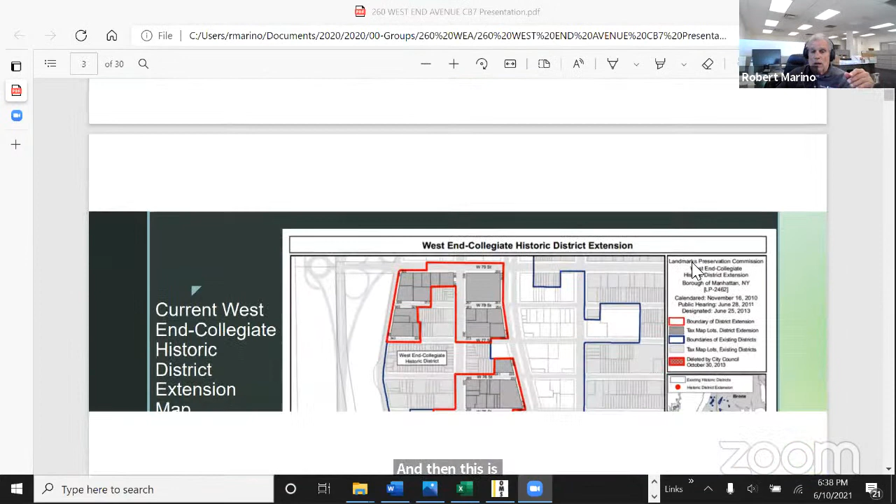And then this is what we sent to Landmarks and to you as well. So this is the map of the location. This is where the building is in the West End Collegiate District. This is an aerial view of the building on the corner of 72nd and West End. And if I'm going too fast or too slow, just nudge me. Thank you. This is the southeast corner. Yes. Okay, so this is a tax photo of the building, from 1940.

Here's another, this is a photo from West End Avenue. This is the building here on the right. I had to get two because the view is not so good from just a straight-on tax photo. And then this is from the 80s, tax photo. It's a better view from 72nd and West End. This is present day, kind of looks the same, except the bridging, which is everywhere in New York.

And then here's our elevation drawings. This is one of the primary facades, the west facade. Wow. And then here's the other facade, the north facade, which is another primary. They have two. And then these are the ones in the rear, to the east, non-visible. I wasn't sure if I should have included all of these or not, but they're included. Same with the south. They're not visible from the street.

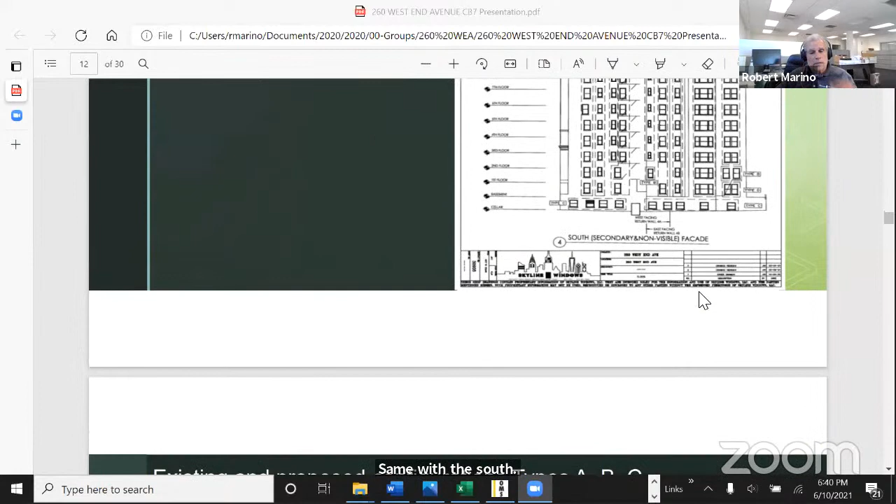These are the window types that we're looking to put in. So this is A, B, C. Here's the existing at the top, and the proposed are below. So they're basically all as they are now. Yeah, it's the same, right? Yes, sir. And then we have two more types. These are the double windows, and these are the triple windows. Some of these are in the rear, some are in the front. We call them out. And there's more, I forgot. So some of these in the back here are lot line windows. Those are fire rated windows.

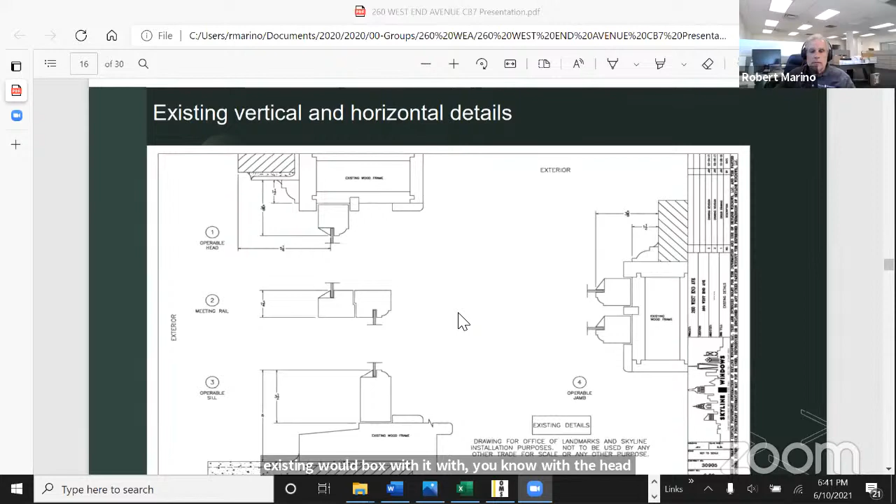And then here's our details of the existing wood box with the head and the sill and the jambs. And then this is the original mullion detail. And then here's our proposed sections. We're using our Series 100 window that we manufacture in Teterboro, New Jersey. We've passed many Landmarks criteria with it. This is our brick mold, which we believe is pretty close to the original brick mold. Over here too at the jamb.

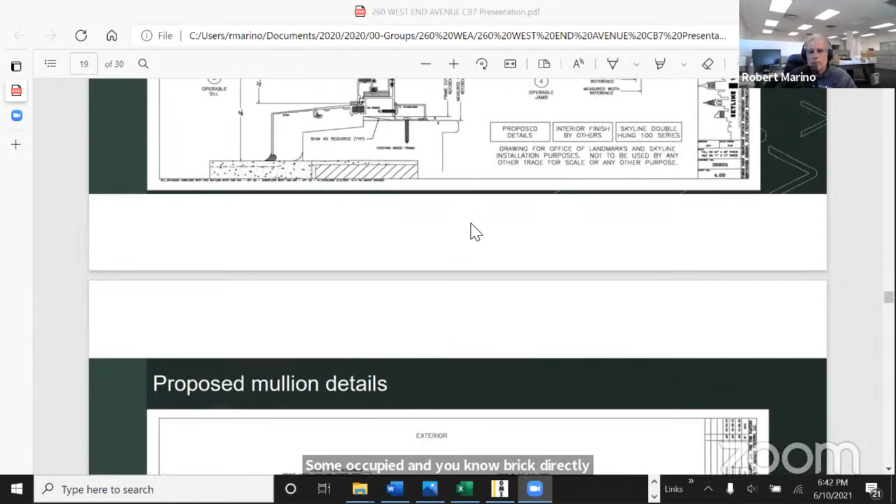We propose to do it within frame as the apartments are all occupied, and brick to brick would be pretty obtrusive to everybody. Here's our mullion detail, with this decorative here. There are lot line windows, so the lot lines have to be installed brick to brick in order to meet code. So this is the section of a proposed lot line window, which are on the south facade by the service entrance, which shows up in a photo.

These are photos of the primary facades with each of the window types, marked as per the elevations we had. This is the north facade, same thing. Now we're in the rear. This is all back in the courtyard, so none of this is visible from the street. So these are the lot line windows I was talking about. These are right over the service entrance on the corner of West End. It's this right here. These are all steel. They're supposed to be fire rated windows because of the proximity to this building right here.

So I found a window in the back that was an original window. This is from the 80s? No, before that, the 40s. This looks like an original window to me. Okay. It's a wood window. Yeah. It's got some kind of venting in it or something, I don't know. And then there's a close-up of the brick mold, which we feel our sculpted panning will closely replicate. So it'll be protective of what's underneath.

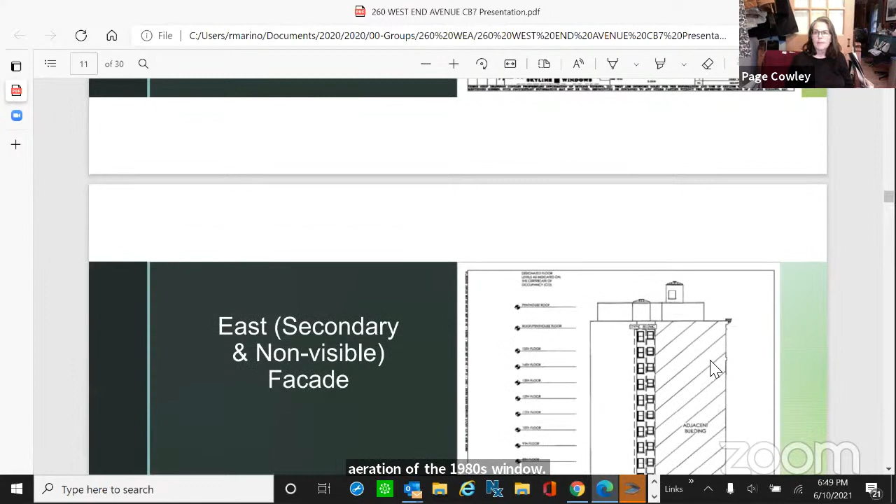Did we lose her? Yep, I have a few actually, and just interrupt me or stop me whenever. You showed the chronology and the documentation of the only surviving wood window, but didn't show us the documentation of the existing aluminum. Because in the old days, I'm an architect, I confess up front, sometimes the old brick mold or the window box for the sash weights were left in place. So I'm curious how much of the evisceration actually took place in the 1980s. In my experience, they tend to be a bit hit and miss. So can you elaborate on that?

As far as what the brick mold is underneath, you mean, are you asking me, did we remove the panning or capping from an existing window? Correct. No, we didn't. And that's a good question. Would it be terrible if we made a recommendation that, as part of your work, you document what you find? No, it wouldn't be terrible at all.

It sounds like it's a wise call to do that. I wouldn't argue with you on that. I think the reason we did is because we found an original one and we took the detail from that. But as to what's underneath, which is what your question is, you're right. I don't have that answer. But that's why we were going to remove the window and use the panning that we feel best serves the building, because it's pretty close to the original brick mold.

Well, my second question relates to that, because on the type A wood window that is at the back, the actual brick mold comes down in front of the ledge of the window, not where it meets the terracotta or brick or whatever the substrate is for the windowsill itself. And so I think that's an important detail, and it does have a curve. I couldn't see it. This is my first time looking at your project. Okay. So I apologize, but okay.

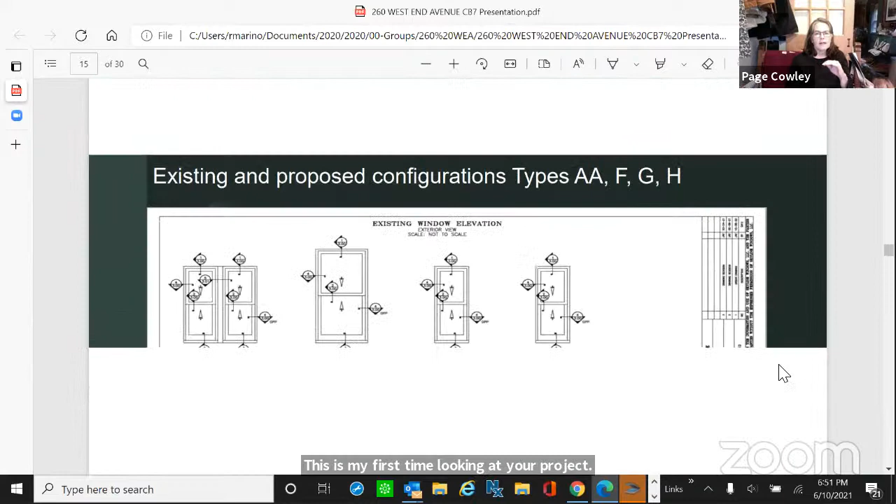If you look at the way, because what I'm concerned about is that this is a very contemporary window appearance, and there's no hearkening back to what was there, if you see what I mean. Now, this one you have, it's a shame I can't point. I'm concerned for 2 reasons. The way this is shown now, the angle at which the old window box was attached is only filled by mortar or caulk around the edge of the window.

And the original detail on the wood window shows that crevice being covered by part of the original decorative mullion that conceals that. So it's a good weather protection. So I'm a little concerned about that. And also the shape of the brick mold that you're showing right now. Oh, those are the existing ones. Is this a hybrid where the box is wood and the existing 1980s windows were just fitted to that?

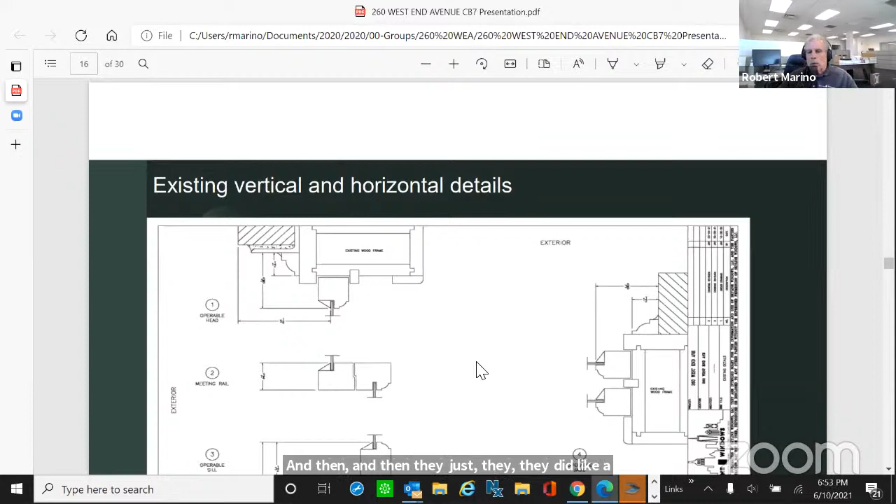All of these windows were installed over the master frame, the master wood frame. All of them were, and then they did like a capping over it, which has no shape. So we have a couple of panning details, OG and Colonial, that we use; this one we're using Colonial. Here's an example of what we're talking about doing. You can see in the upper left, over here. We feel it mirrors it. It goes right with it, we think.

Okay, so what we did was when we went to measure some of these windows, like we said, we did not rip off any of the capping, but my head engineer did detail the window, and that was the detail that he drew, which is based on what's there in the one window that's exposed. That's what his drawing was. Did I do that? No, I didn't do that. I'm not a good drawer. I'm not a good artist. Okay, and my last questions are much easier.

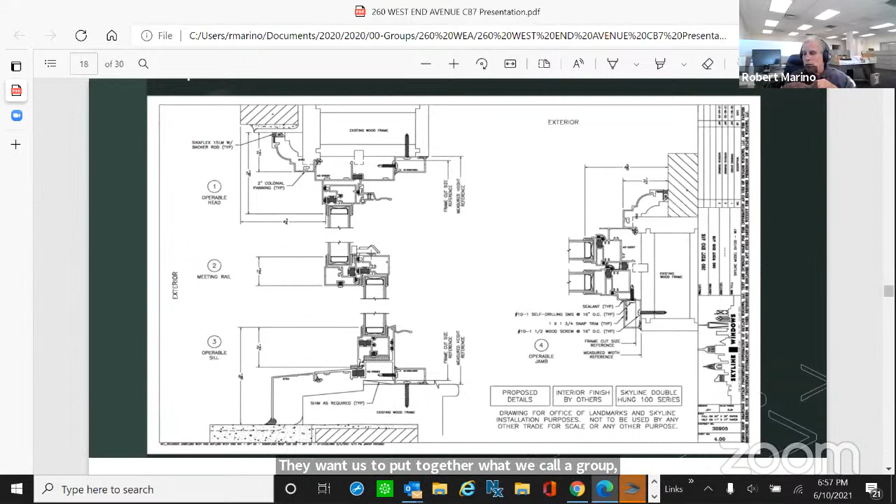Thank you, Kay. I guess my question had been, do you know if the building is anticipating changing all the windows at once, or is this a plan? No, they want us to put together what we call a group, because the building is not paying, they're not doing it as an assessment. Okay. Each individual owner would pay for it as they upgrade. It's very typical. Oh, yeah. Okay, thank you. Anybody else on the committee have a question?

Okay, how about board members, non-committee board members? Ira, is he still here? Let's see. We take a vote? Doug, any questions? Ira? Miranda? No? Anybody from the public, Michelle? Public members, any questions? They would need to raise their hands to ask one, so look for your raise hand function on your participants button. Okay, I don't see anybody. Mark, can you confirm that? Is nobody from the public? I see no hands raised. Okay, Michele Parker, any questions?

Okay, I'd like to propose that we resolve to accept. I don't have any questions. Thank you. Oh, okay. Thanks, Michelle. I would like to propose that the resolution is accepted as proposed, but I want to add Page's recommendation, but I just don't know how to word that. So can you help us out, Page, what your recommendation was? Approve still with the recommendation.

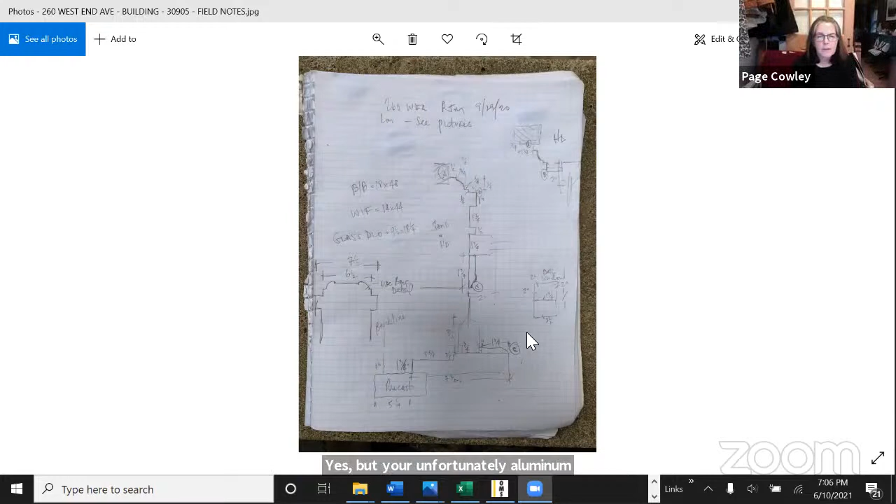Do you see this notepad here? Yes. Okay, these are Bob's details, right there, which I guess I could have included for you. Maybe that would have made it more simple. But those are his details. They look pretty precise to me. Yes, but unfortunately, aluminum doesn't behave the same way. No, I know, but what I'm saying is he took the existing little type A window and drew this. That's what he drew. Okay, that's good. That's a start, but is that the same detail for every single window type on two sides of the building? I guess I would have to try something on the other side of the building to see. I got you.

I want you to be a success, and in the 20 years it's going to take you to get this thing done, I want them all to be perfect. Hey, so did my mother want me to be a success, you know? There you go. Have your mother call me.

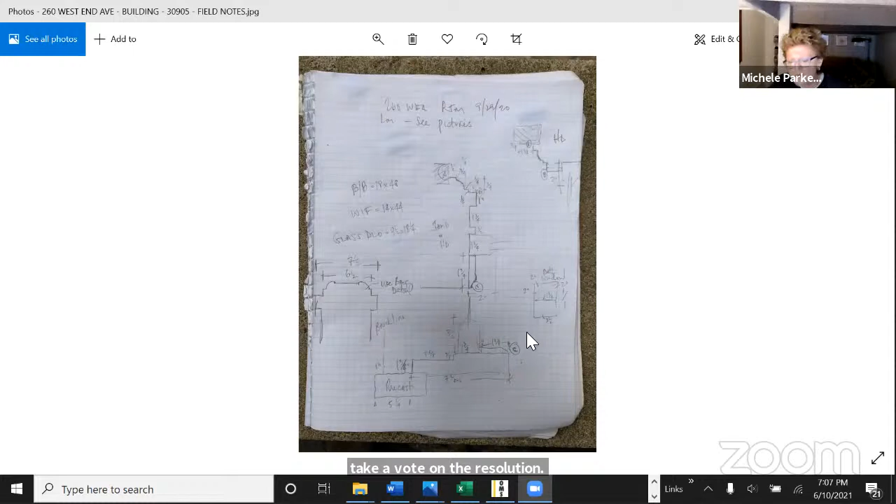I think for purposes of full board, though, we have to take a vote on the resolution. We have to have a resolution and vote on it. And then we can also say that the applicant agrees to come back to us on the 8th of July.

Could have a resolution that is approving pending a return with these details on the 8th. I mean, that would be my suggestion. From a process standpoint, Mark, I think you would agree, the last thing we want is to deny the application. We'd like to work with this applicant and make sure that they can come back and be successful. I don't know why, in the past, we've never voted down things that we needed to see again.

Okay, it's your call. So from a process standpoint, as opposed to an artistic standpoint, we either need an agreement that they're coming back, or we need to take an action that would fill the gap if, for whatever reason, the applicant doesn't come back, because Robert's here as the expert and the consultant, but he's not the client, and it's a client decision.

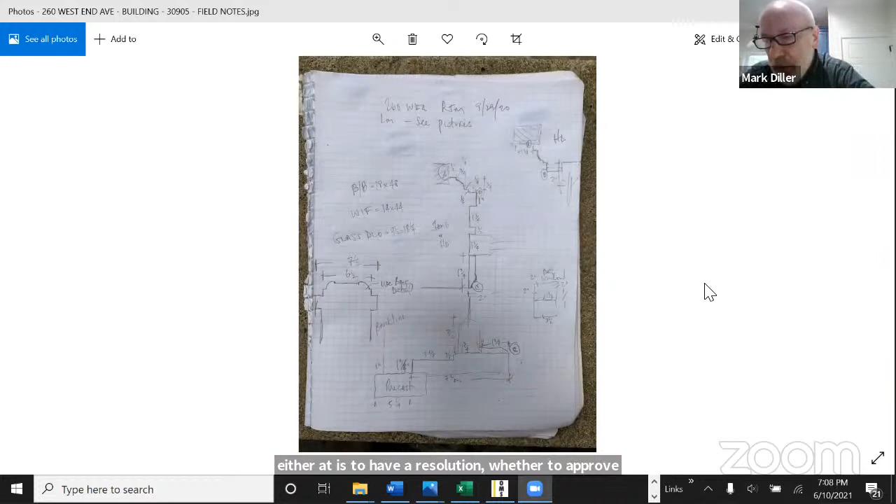I guess the thing to do would be to have a resolution, whether to approve or disapprove. And I take Page's point that we would want to approve, but we would have a fairly serious condition, and that condition is that the brick molds, and help me with the correct terminology, Page, but the brick molds conform as exactly as humanly possible to the historic fabric that was in place prior to the 1980 replacement windows. Is that language getting at it? You're getting close to it?

Yeah, I would elaborate on that only because there's so much panning already. When you've got an aluminum window that you're trying to follow with another aluminum window, you don't know what's underneath. You see what I mean? Wait, the aluminum window is over the wood window. The aluminum window would come out and the panning would come out, and then we would cover the existing wood that's under there. Yeah, but we haven't seen that. You've got one detail in one location, and this is two sides with a special top. So I'm giving you every benefit of the doubt that you're gonna be perfect if you come back and do some more digging. Got you.

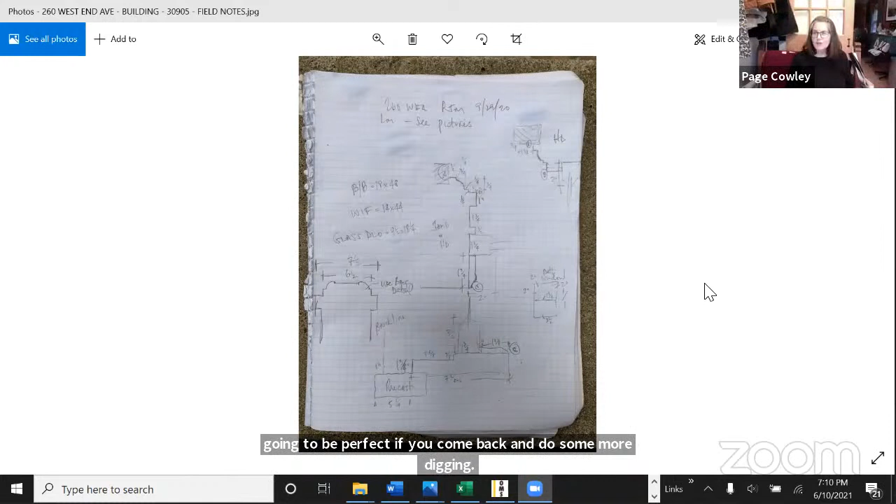Now you sounded more like my mother again. There you go. I'm way too young to be your mother. Of course you are. I know that. I'm just teasing.

Okay, so the resolution is to approve the application with that condition. No, I wouldn't do that, because then they won't come back. It can't be an approval; it has to be a denial until they come back and give us the information we need to make an accurate vote. And I won't say any more. Excuse me, but I agree with Page on that.

But I have a question. Would it be a problem to delay the LPC hearing, Robert? It would be a problem for my clients in the building. It would be a big problem because it's been going on for some time. We got slowed down by the pandemic, and they paid money for us to do this. So I would say yes. Our hearing is July 20th.

Mark, here's an idea to wrap this up. Mark, Michelle and Kay, if I may, one thing that you could agree to do is to ask them to come back on July 8th, which is before the 20th, right? And then we would agree that whatever resolution comes out of committee, we would not require a full board vote on that, so they could keep their reservation for a public hearing, and CB7 will be heard based on a committee resolution, which dilutes the impact of what we say a little bit, but that would be a way to have our cake and eat it too.

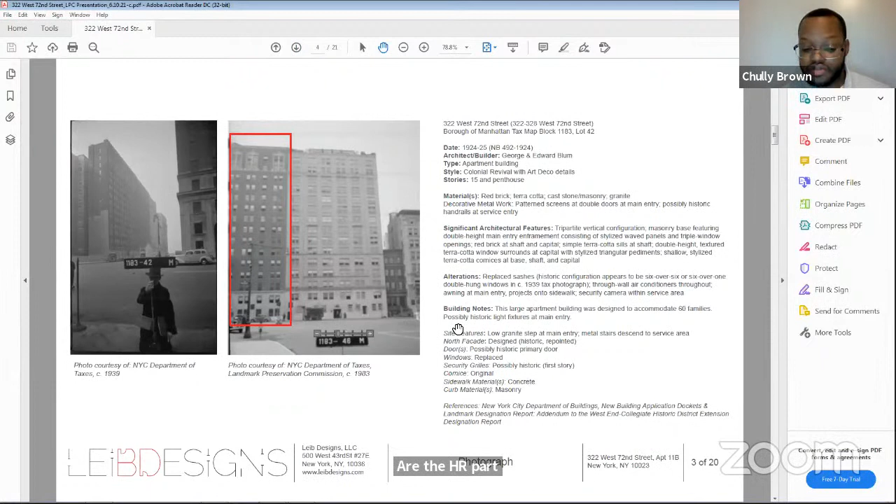From the designation report, the main significant features of the building are the tripartite vertical configuration, the masonry base shown here, the entry with the triple windows, which is shown here. The entry with the triple windows, the masonry base, the materials such as brick, red brick, and terracotta sills. And at the very top, we have these triangular pediments at the penthouse apartment.

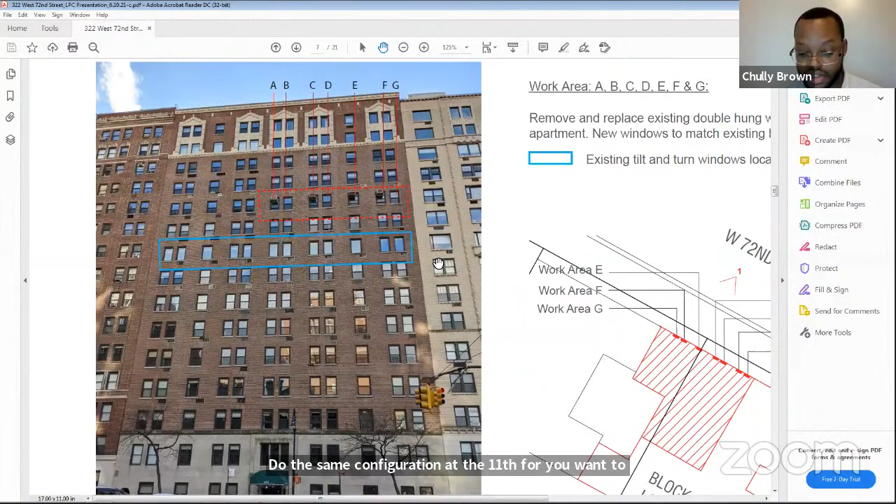The existing condition we have at this building at the 9th floor, we have these single pane windows at the 9th floor apartment. Our apartment is at the 11th floor with the double hung, and we want to do the same configuration at the 11th floor. We want to change our windows from double hung to single pane windows. We could see similar condition at the adjacent building, 330 West 72nd Street, where you have random single pane windows in relation to the 322 West 72nd Street building.

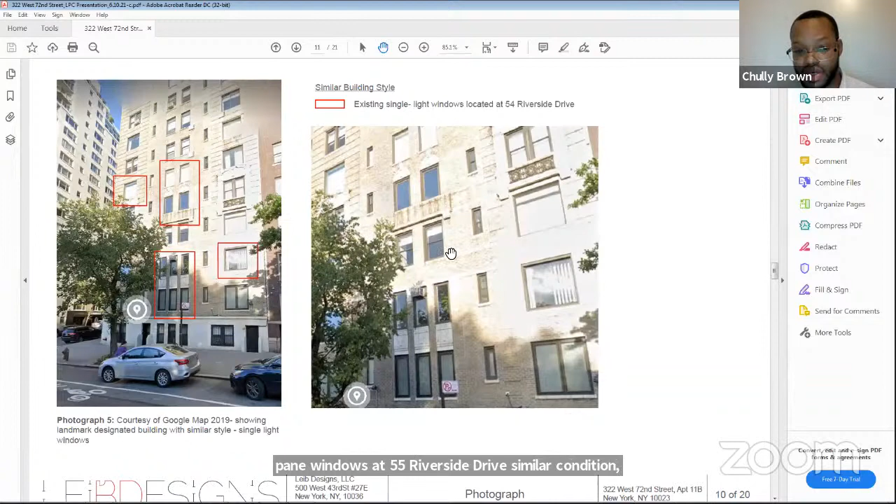I did some research and we found a similar condition within the district at 54 Riverside Drive, not too far away from 72nd Street. We can see this similar condition of having single pane windows. At 55 Riverside Drive, similar condition, designated building with these single pane windows. At 52 Riverside Drive, similar condition. At 243 West 70th Street, similar condition. At 240 West 73rd Street, similar condition. And also at 239 West 77th Street, similar condition. As well as 235 West End Avenue, similar condition.

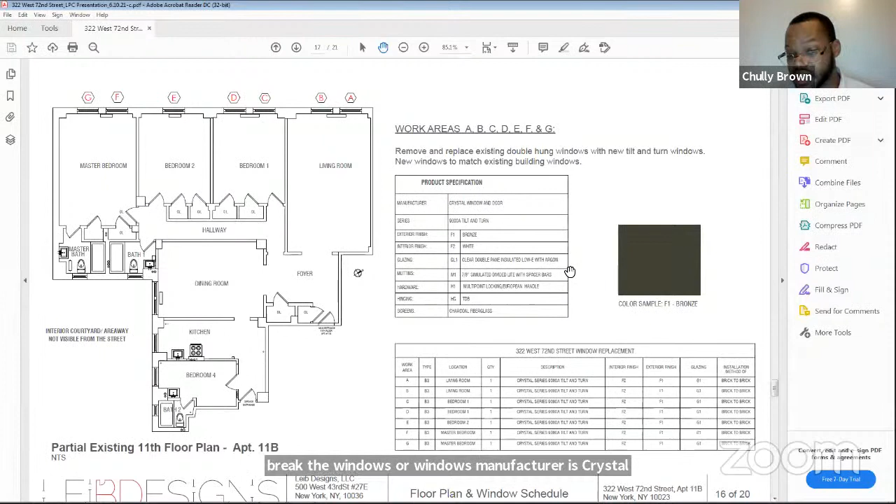Here we're showing the floor plan of the existing apartment and our window location. We plan to replace the windows with the same finish as bronze, brick to brick. The windows manufacturer is Crystal Series 900. Here we're showing the work areas within the apartment, A through D, the existing double hung windows from the interior. E through F, the existing windows from the interior. Partial facade showing the double hung windows and the proposed tilt and turn. We're also showing the installation guide and sectional details.

Okay, what time? 7:30 to 11:30. Susan, we can hear you. I'm sorry, Mr. Brown. Okay.

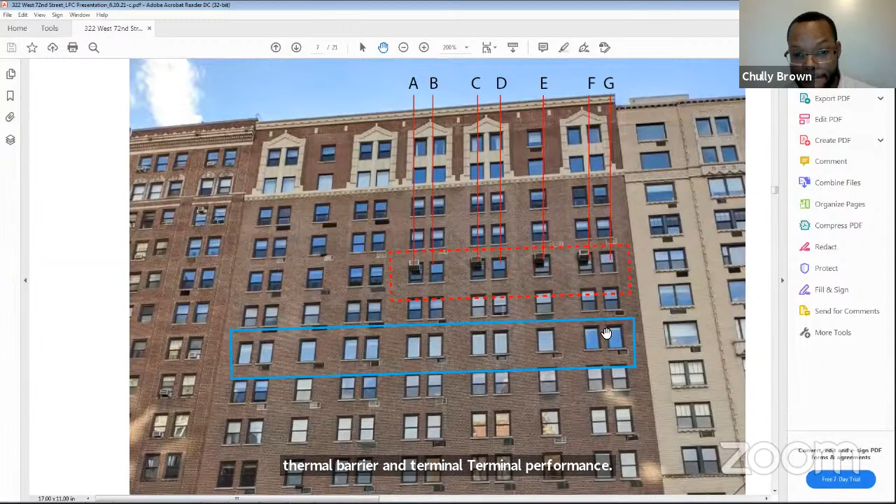I'm just gonna go back to the main facade. Looking closely at the facade, we can see at the 9th floor, we have the single pane windows, and also at the very top, the penthouse, we have the single pane windows. So we believe our proposal doesn't hinder the significant features of the building. These windows provide a wide range of benefits. They're easier to clean, better ventilation, better thermal barrier, and thermal performance. Thank you. Thank you. Questions from the committee?

Peter goes first. Yeah, I think it's a quandary. I think it's not so much a question that I have, but we find ourselves in the middle of something that could go either way. I think it would be unfortunate to have a bit of both the single pane and the double hung sort of live together in disharmony. I, for one, am not that keen on having to continue the double hung for historic reasons. I like the single pane, but I think mixing the two is not ideal. So I think it's a quandary. I don't know what one does.

I would say if this is a building that didn't have the single pane window, that it would be a mistake to allow one and keep what is there. But the fact that there are already quite a few buildings with the single pane creates a situation for us that's hard to establish a better way to go. So I'm perplexed as what to do. I don't know. It's a tough situation.

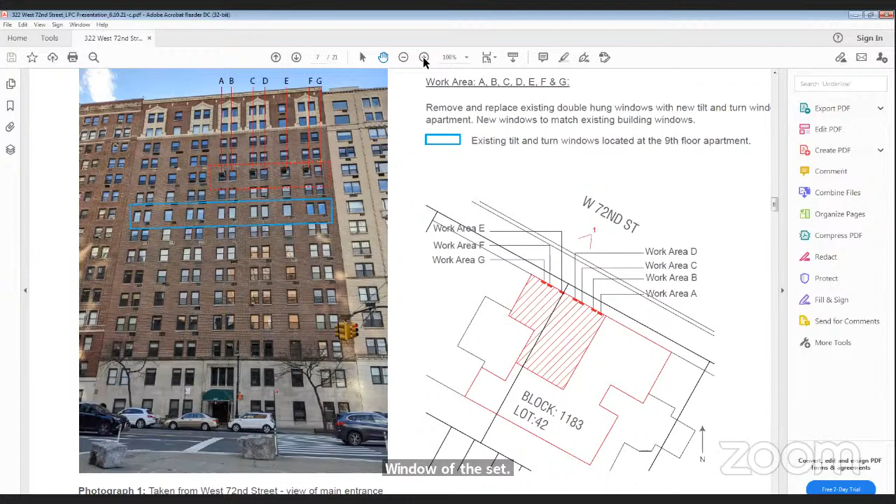As far as standardizing the through-wall ACs, the building's request and what Julie prepared previously for that application was that we try to match what the building is considering standard, or the more recent through-wall air conditioner openings, which was basically a mid-size one, very similar to the floor below, lined off the west window of the sets. There's really no consistent pattern or standard, but they all tend to favor the western edge of the window. So that's what we did. We made sure that it wasn't oversized, tried to minimize the impact, but in some way continue some kind of pattern. So I don't believe the building would need any more through-wall openings besides the ones that we just did.

Is it your intention then that the other tenants have the package units on the roof? Correct. It's unlikely that anybody else would have to do a through-wall AC. It looks like we were the last apartment that did not have that. And are you planning to close up some of these openings that you see? No, all the openings that are made are in use. And the ones that are not there will not be needed due to the condensers already installed that provide AC for those apartments. Thank you very much. That's a very good explanation. I wish that had been documented on the facade. That would help. Okay, thank you. So our focus is really about the windows. We did speak to board members and other owners.

The tendency of the building is to go to the single pane tip and turns or tilt and turns. It doesn't seem like anybody has an interest, especially because the top two floors, the four nicer apartments on the front, it's unlikely that they would go back and take out those windows and go to a double hung. And then the other people on the lower floors, I know they like the single pane. So it seemed like the tendency of the building, if we wanted to standardize, which of course I would love, would be towards a single pane window.

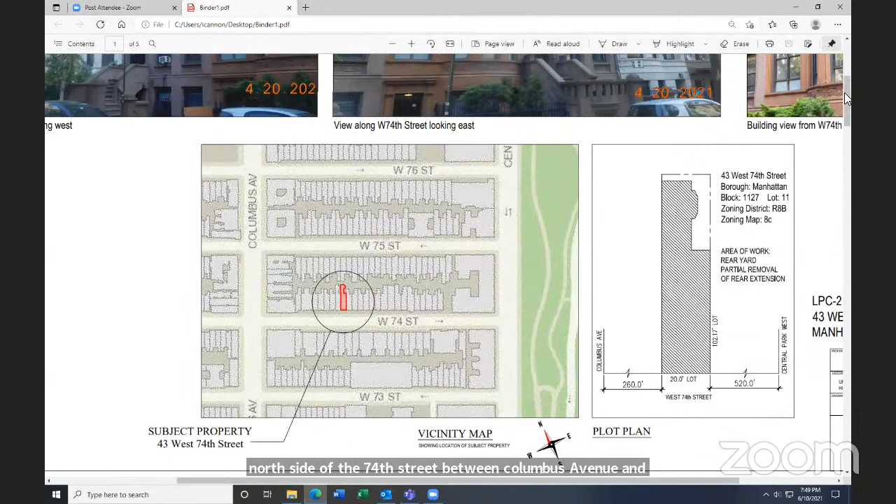Okay, can you see that screen? Yes. So this first sheet is to just show the location, get you all on the same page. The property is 43 West 74th Street. It's on the north side of 74th Street between Columbus Avenue and Central Park West. To the right is the view of the building, and we have two photographs, one including the building looking east, so you can see it within context, and a second photograph of the building looking west. So again, just to provide some context.

This particular building was designed and built by a single architect with 5 buildings together. So this is one of 5 that the architect designed and built. That's the first page. The second page provides a little background of the building itself. This map from the city is dated 1889 to 1890, when it was first constructed. As you can see, most of the buildings had a rear extension, a smaller portion of the building that extended into the rear yard, and in 1889 all of those rear extensions were approximately the same.

Then we get to a city map dated 1920, and all of a sudden you see something different. Somebody at some point had installed an additional extension at the rear yard of the 43 building and also at the 45 building. So of the 5 buildings designed by this single architect, you've got these 2 buildings that are different. That's something that was added.

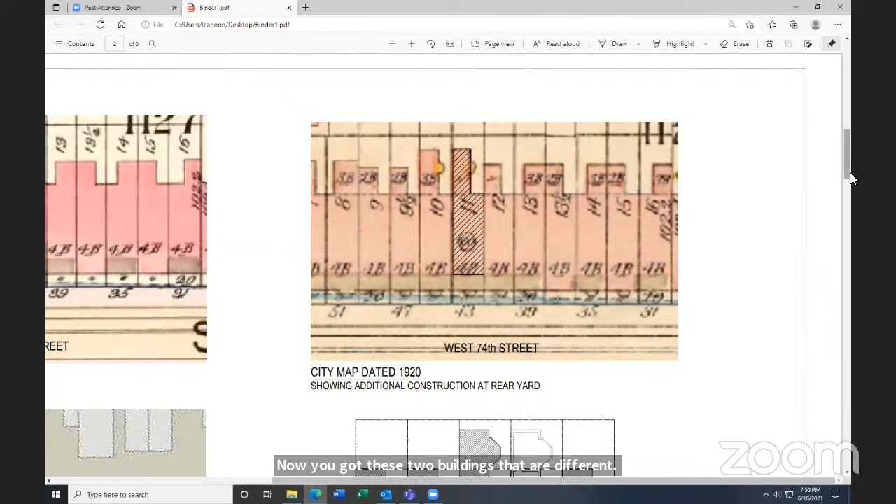And then this is the current configuration showing these are the 5 buildings that, in the designation report by Landmarks in this historic district, they point out for these 5 buildings, all designed by the same architect. So this anomaly that was added at some later date is still existing at this time. So our proposal is very simple. It's very straightforward. Nothing visible, nothing in terms of the front of the building.

This owner owns a number of properties. He's involved in real estate and construction. They own a number of properties in landmark districts, and so we present to Landmarks quite a bit. We just completed approximately $1 million restoration, replaced almost 1,000 pieces of historic detailing on a building on a cast iron facade downtown. Landmarks was so thrilled that they wanted to present this as an award to the building. So this is the owner.

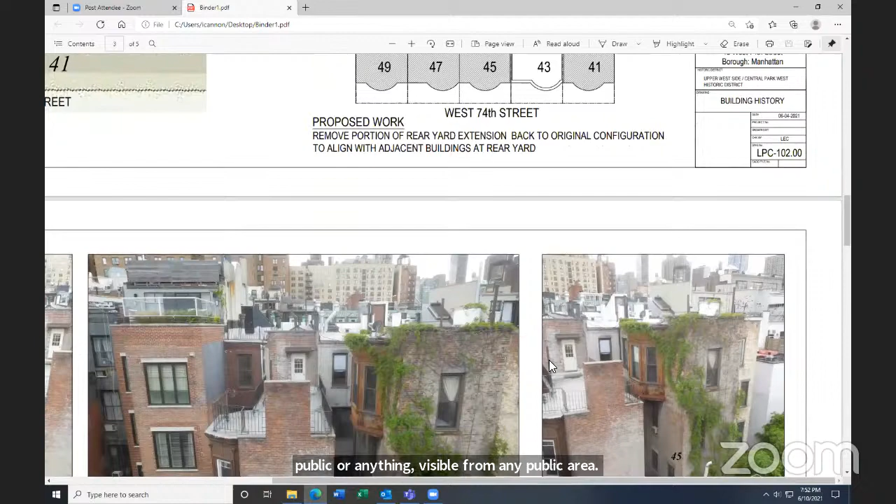So the front of the building will be fully restored, 100%, total restoration. And the only thing that Landmarks wanted us to go to a public hearing for was the removal of this rear portion of the building. So again, nothing in our application here is anything public or anything visible from any public area. So that gives you kind of the context of the property and the history.

We got access to a building on the other side of the building. So we took some photographs just to show the rear portion of the building within the context of the buildings adjacent to it. So the photograph to the left is showing the 43 building, which is our building. And then adjacent to the east is 41. They've done some work with replacing windows and things like that. And the center photograph shows both the 43 building and the building to the east, and then the building to the west as well, which hasn't done any renovation. And then the photograph to the right showing, again, context.

This photograph kind of gives you an idea as to what our intent is. So this photograph is taken from the rear of the 43 building looking east. So you can see where most of the buildings on the block have an alignment to this rear extension. And that is our goal. That is what we're going to do, is to restore the building back to its original design and to align with the rear of the other adjacent buildings.

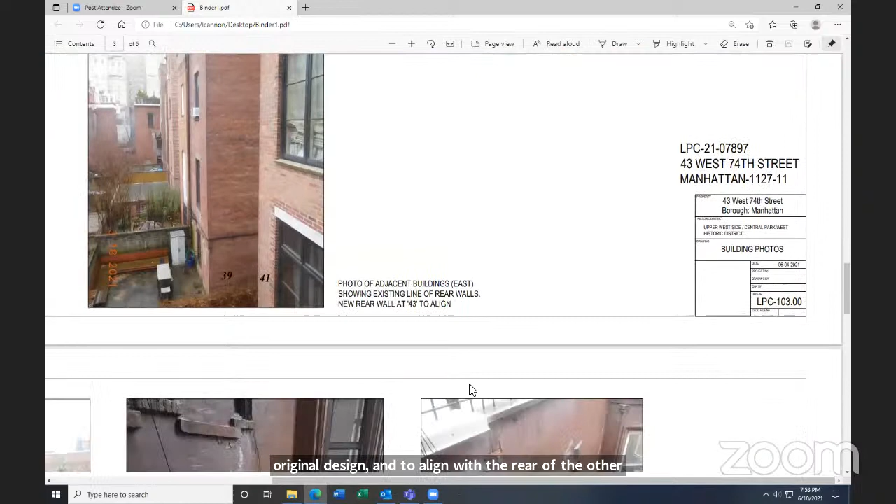These are some photographs just of existing site context. So right now, with the extension as it is, we only have about a 3.5 foot distance from the rear wall of that extension to the rear property line. So it's really unusable. And as you can see, it's not in good condition. And one of the things that Landmarks requested is that whatever is remaining, as you can see, the brick has been painted and it's in poor condition, is that we restore the original brick finish. And the owner said, absolutely, they will do that.

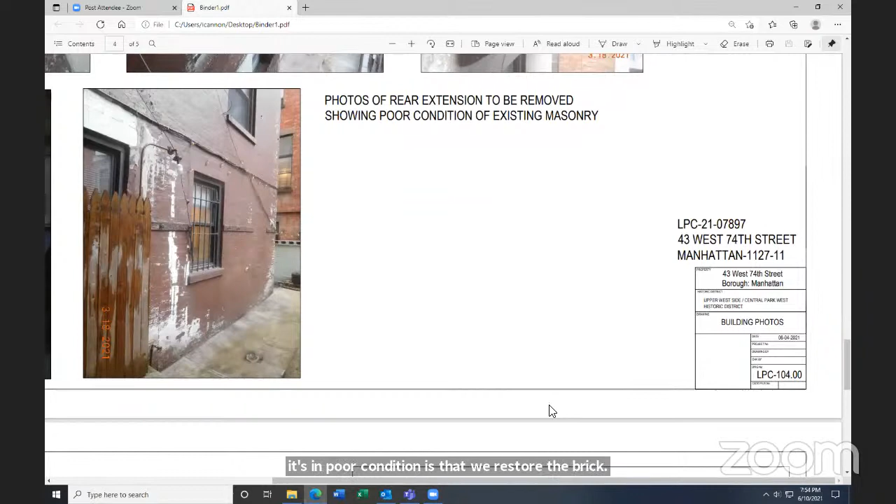And then this is just to kind of summarize what we're doing, showing the very rear portion that was added at a later date, not intended by the original architect. We're going to take that off. We reviewed this with the deputy director at Landmarks quite extensively. And they said in writing, they think this is an appropriate change and they have no objection to this. They did ask us for three things. And this diagram with the photograph shows those three things. And again, the owner has certainly agreed to these.

One is that there's a small portion of the brick parapet at the roof. I don't know why it's there. They want that removed, so we will remove that. Second thing is, if you see that little brown facade, there's a little bit of a brick cornice. They want that restored all the way across the rear wall. And again, the owner said, absolutely, we will certainly do that. And then the third one was the window. The only window that they wanted to maintain the existing size is this window at the 5th floor. And again, the owner said, absolutely, we will do that. That's our presentation and that's our proposal. Thank you very much.

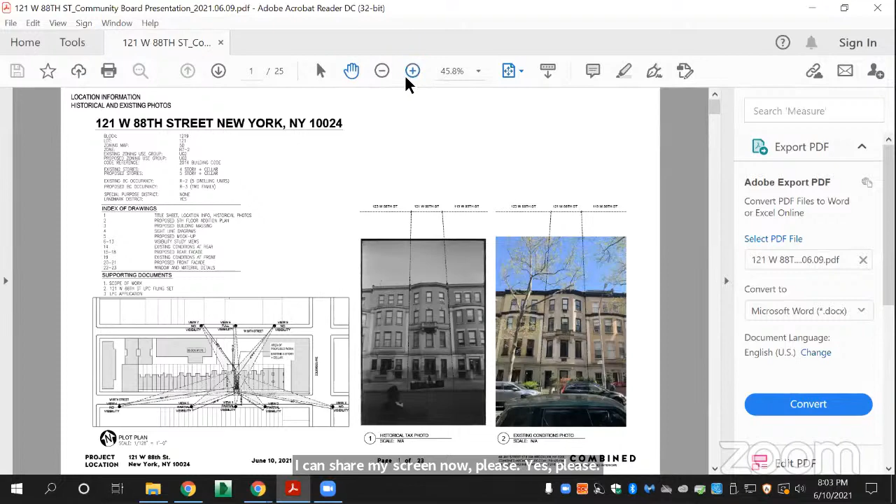Got it. Can you guys see my screen? Yes. Very good. I'm trying to go to full screen.

So thank you for meeting with us this evening. This is a proposal; this property came before you twice previously with a different team, I think it was around 2019. The scope of work was somewhat similar. It was a vertical enlargement, as well as some modifications on the rear of the building. My understanding is that initially the proposal was to do some demolition in the back. That was not found to be acceptable.

A second proposal was put forth to Landmarks. Since then, they've changed the project team, and this is a new proposal for an enlargement on the roof and some modifications of the rear of this building at 121 West 88th Street. It's an 1898 Renaissance Revival townhouse by Alonzo B. Kight.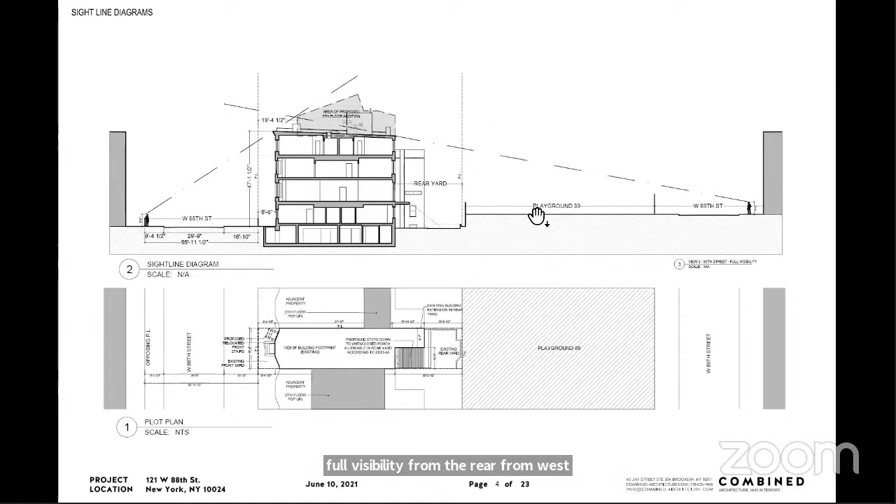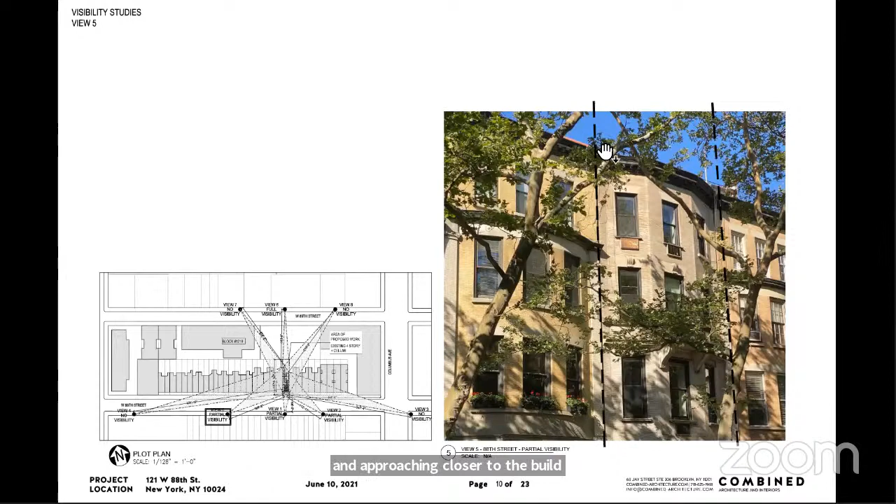On the angle, that's the roof line. So it's about 10 to 12 inches of visibility of that addition roof line from West 88th, front facade of the building. Moving down the block, there's no visibility. From the other angle, looking back, no visibility. And approaching closer to the building, again on the diagonal, you're getting about 4 or 6 inches of that roof line, which is the orange mesh you're seeing right there.

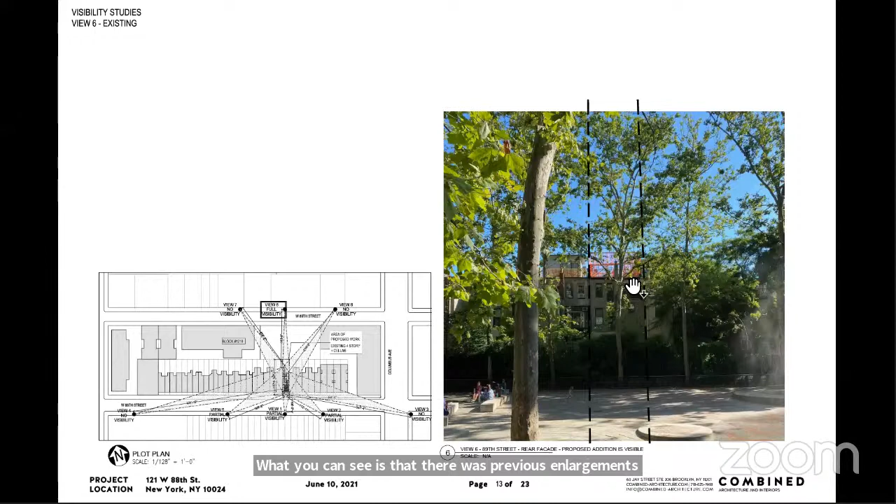From West 89th Street, no visibility from the two oblique angles, but as you approach frontally, the nature of the property is that all of these rear facades are visible due to the presence of this playground here. What you can see is that there were previous enlargements on both of the adjacent structures that predated our proposal, obviously. Some of them may have predated even the designation; I don't know the history of that. This was done earlier in the year, so there's fewer trees blocking it. Our property is the one in the center.

A couple of things to point out, and I think this was important in the last set of reviews, is that the footprint has a series of extensions that are mirrored with the adjacent property along the block. This was all developed as a continuous series of row houses by the same architect and developer. We are proposing to maintain all of that massing. What we are looking to do is to rationalize the rear windows, enlarging them slightly, and then obviously the addition on top. What you're seeing in the foreground is the portion which aligns with the adjacent building. Above that, this is set back significantly due to the taper of the roof and setback. That's the door access. This is the mechanical equipment and screening, and then there's a skylight in between.

The images on the right are the rendering that's kind of showing the right and below the proposal within the context. So again, that setback portion is not entirely invisible, but it's largely obscured due to the sight lines because of the setback. So you're seeing a little bit of the pergola and then the mechanical screening and the bulkhead there.

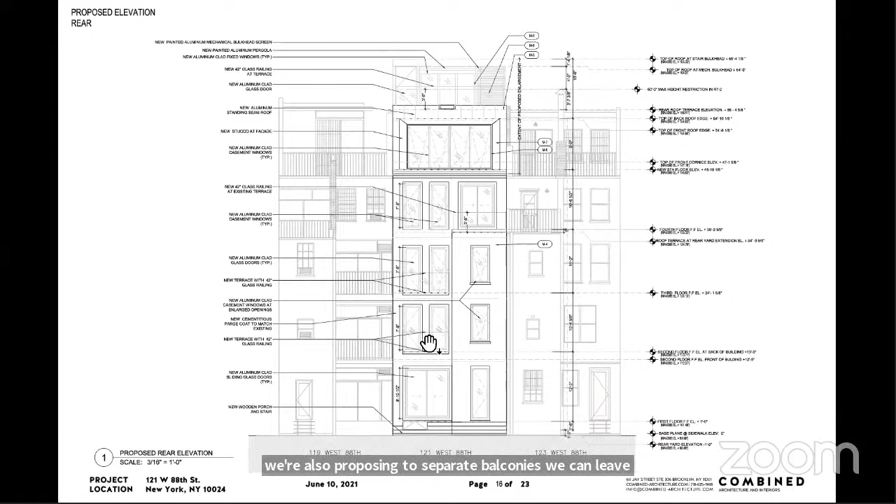Oh, sorry, went too quickly there. That's again just showing the rendering within context, matching the massing of the existing, and then just rationalizing the window fenestration pattern. Existing front. So on the front of the building, there's a series of staff level approvals that we were just asked to also include in the presentation.

And so the building originally had a center entry, which is also consistent with many others on the block. At some point, it had been modified to a side entry. Our intention is to restore it to the center, so modifying this back to the original configuration, including an entry from the gate from the sidewalk. So you're seeing here that front restored entry.

There's also, historically, some through-wall air conditioning units that had been put through the brick. Those will be infilled with a matching brick, and the masonry will be cleaned. Windows will be replaced in kind. We're maintaining the existing wooden brick mold and replacing them with a clad 1/1 window, which is permissible at the staff level, we understand. A blow up of just the historic photo of that entry condition and what we are proposing

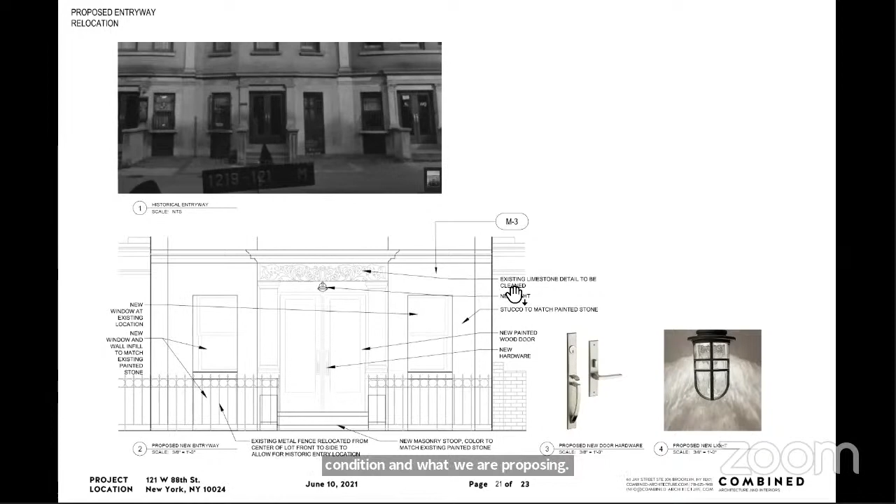to restore that to. And the existing windows actually had been clad with aluminum. We'll be removing that and bringing back the original brick mold and doing a clad window insert within that, maintaining again the articulation of the original brick mold. And some of the proposed materials. So up at the enlargement, we're looking at doing a standing seam roof. There's going to be

the rear of the building is an existing cementitious parge coat, which is in pretty bad shape, so it's probably going to be replaced entirely in kind, but it'll be matching the original parge coat. And then we are doing, as I mentioned, an infill where the penetrations were made in the existing front facade when they put in those through-wall AC units. And that is the full extent of the presentation.

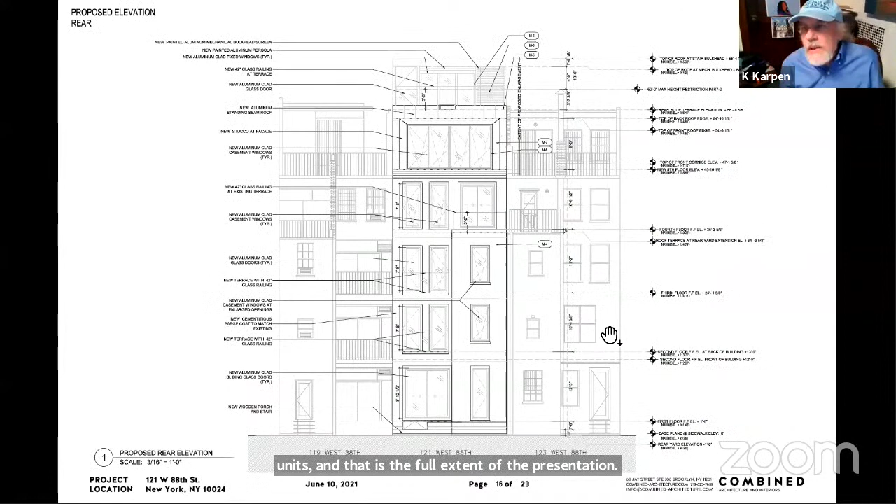Okay, Madge has a question. I have two questions, three actually. I need the gentleman's name. I didn't get it when he first started speaking. Brian. I'm sorry, Brian. Okay, this is Brian Rappel. Yes, that's right. Okay. My first question is, how tall is this addition and how tall is the whole building without the addition?

Sure. So the existing, we go to the front facade. The existing height of the cornice on the front facade is 47 feet and change, 1 5/8 inch. The existing height of the rear cornice, it's a pitched roof, is about 2 feet less, so it's 45 feet 9.5. On the proposed front roof line, not the peak, but the front at the setback level, we would be going from 47 to 54 feet. At the rear, we'd be going from 45 to 54 feet.

And then the peak, which is really at the bulkhead, let me go back to the section. The peak is at the bulkhead. I'm sorry, one moment. Go back to the drawing. The peak at the bulkhead, which is right here, is at 65 feet. Thank you. All right. And other questions, Paige?

Well, thank you for opening that issue, Madge. Looking at this section, I actually came up with 66 feet at the rear and 45 feet in the front. That's anywhere between 20 and 21 feet of additional height that will be added. And if you look at it from the playground, that's right next to PS 166. The issue is that most of the buildings previously that did rooftop additions centered them in the middle of the building and were only 1 story, where the mechanical equipment was at the same story as the addition.

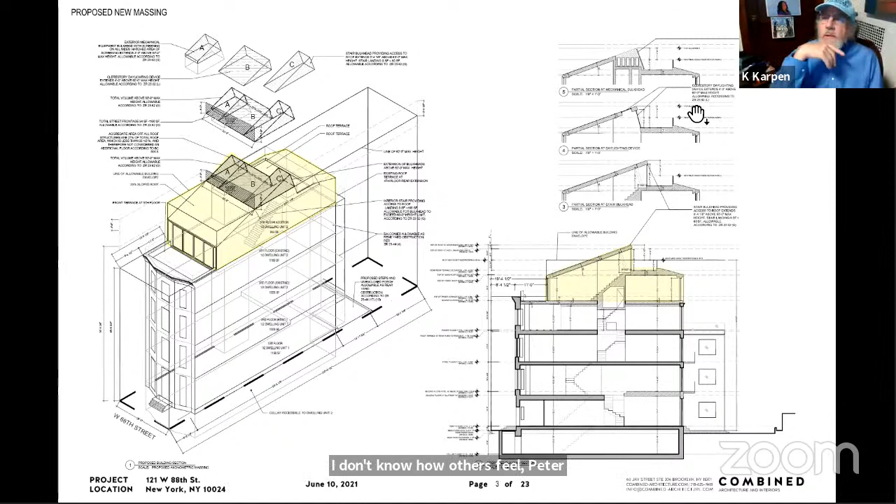Peter, your thoughts? Yeah, I'm the other party that lives on 88th Street, and all those houses, that this is one of many of, really live in harmony one with the other. I think the good thing here is the idea of replacing the entrance to the middle and the front. I think that would be a boon. That would be much better.

That's what most of the buildings on either side have, the entrance in the middle of this, what do you call it, Page? English front or something? Well, they used to call it a Manhattan front because you were elevated just enough to glide into your new home. My problem also is on the roof. I think it's altogether too much. I think the idea of an additional floor makes sense.

Setback, I don't know that the setback here is enough. I think, in my brownstone, I added a floor, but it was set back considerably more. I have a feeling that much of this rooftop addition will be seen from 88th Street. Not just the sloping portion, but the front as well. I think it's altogether too close to the cornice line.

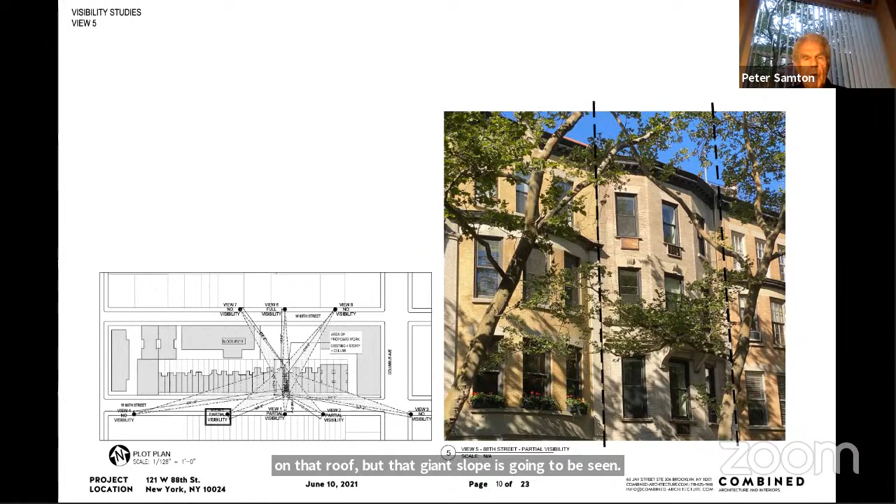I don't have any problem with the addition on the rear, but I think the sloping roof overdoes it. I can respect the idea of going up yet further on that roof, but that giant slope is going to be seen from the other side of 88th Street, from Amsterdam, from Columbus. It'll be quite visible. Well, we have the mock-up, right? Or no? No, not yet.

These are photos from the mock-up. The front and the rear wall of the mock-up are complete. By end of day tomorrow, we're trying to get the entire volume, including the sloped roof, just so that we can confirm visibility. But what you're seeing is the mock-up. So that sliver of orange is the only portion of the roof line which is visible. And part of the idea behind the sloped roof was, if you look, this is the sightline study from the opposing sidewalk, that the pitch of the roof was such that we would be well below any sight line.

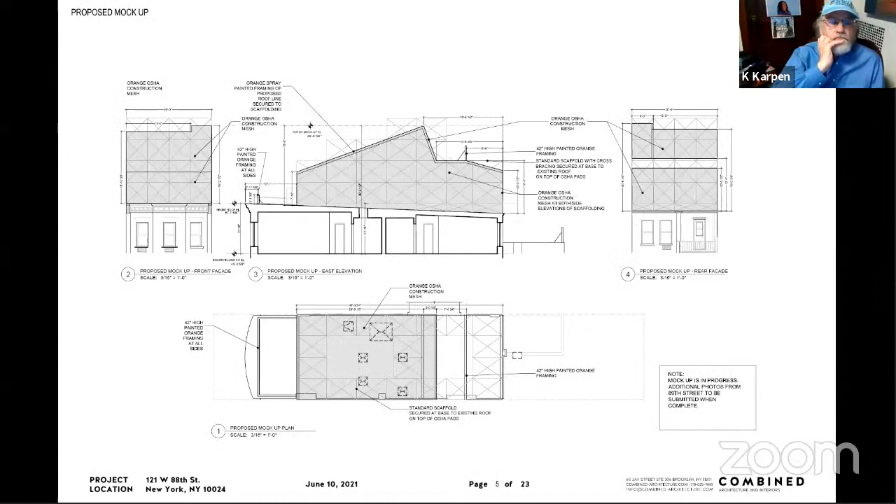Keep in mind that you're showing somebody looking at it right across the street. You walk down 20 or 30 feet, you'll see a lot more. Consider that. I have some sight lines from there. So again, that sliver of orange here is the oblique visibility that you're seeing of that roof line. And by the time you get down to the corner at the end of the block, on the east side, it's not visible.

I'd like to add to Peter's comment that the other thing you're not factoring into your sightline is the fact that there will be a guardrail, which I believe your drawing showed as a glass panel with a metal cap. And because it's a very bright street, we are very fortunate. I live on the same side of the street as Peter does, and it floods with sunshine. That glass will show glare and show dirt. So it will be visible from the street. It's the only one on the block that will have a fence on the front of the building.

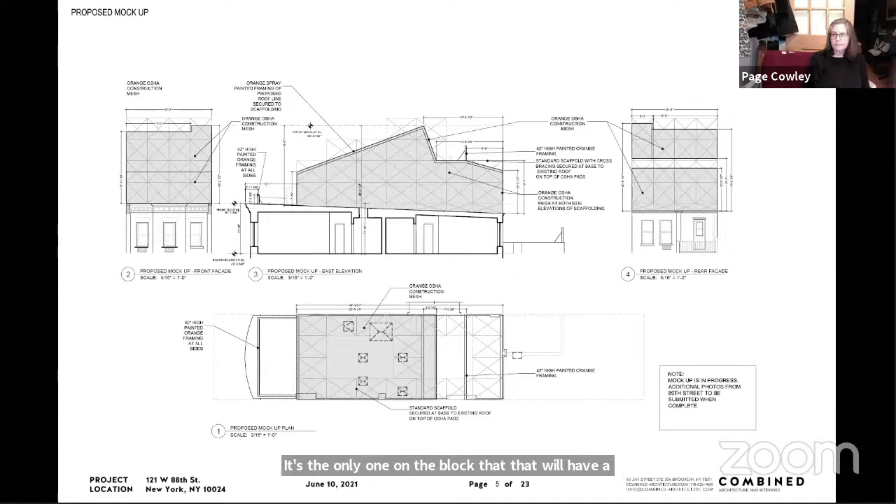How high is the peak of that sloped roof above the existing roof? Above the existing roof, it is about, bear with me 1 second, we went from 47 to 65. It's about 18 feet higher. 18 feet? Yes. That's enormous. Yes, that's 2 floors.

That's 40% of the height of the building, an addition of 40%. I mean, that's a lot. That's a lot. It's enormous. So the height right now is predicated on us trying to get an access point to that roof, which allows us to then have the mechanical equipment at that level. So it's basically a 6'8" headroom that we needed to get to that area, and that's what dictated that point.

Well, then relocate the mechanical equipment within the floor that you've just created. It's too much. I agree with my colleagues. It's just too much. I'll pile in here and say I agree, too much. Ordinarily, at this point, I'd mention I'm a bird watcher and I'd be concerned about the glass, but I already agree it's too much to put on top of that building. So in general, we approve of moving the entrance to the middle of the building because that puts the door back to where it was. I think that's very good.

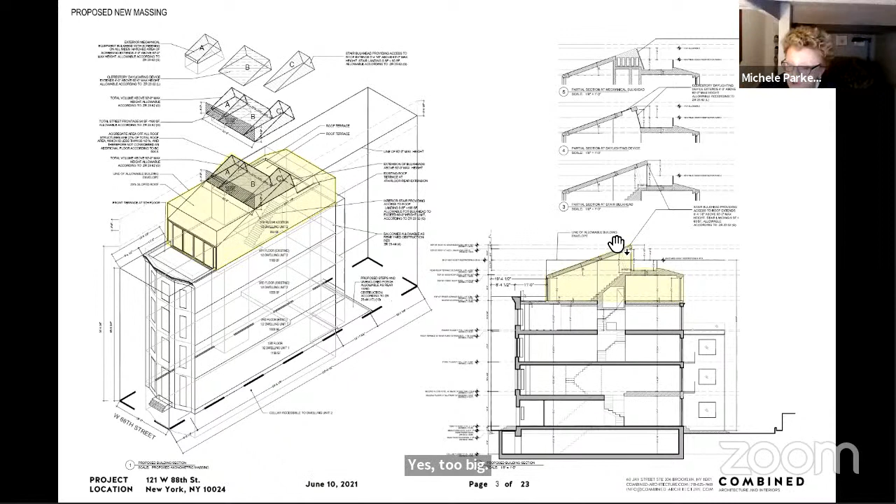And Peter, you said you would approve the addition on the rear of the building. Is that right? But we find the roof is just too big. And they should come back to us with a different plan to minimize the, what did you say, Page? Put the mechanicals? Well, mechanicals going up through a habitable space like that never works because of the way you bump the equipment up, air conditioning. I don't know what else is going up there, but I'm also nervous that it's too close to the edge of the building. It changes the entire composition when you look from the playground, instead of a setback that differentiates it. It tries to become part of the existing building.

If you show your facade, sir. Yeah, I'm trying to get to it. Right. There you go. That's an awful lot of modern architecture, and that will be the only building like that that's visible. And the sad part about the park is that I can see my townhouse. I'm several buildings further west, and you can see all the way to the back of Columbus Avenue. So this just doesn't meet the threshold that Landmarks calls appropriate.

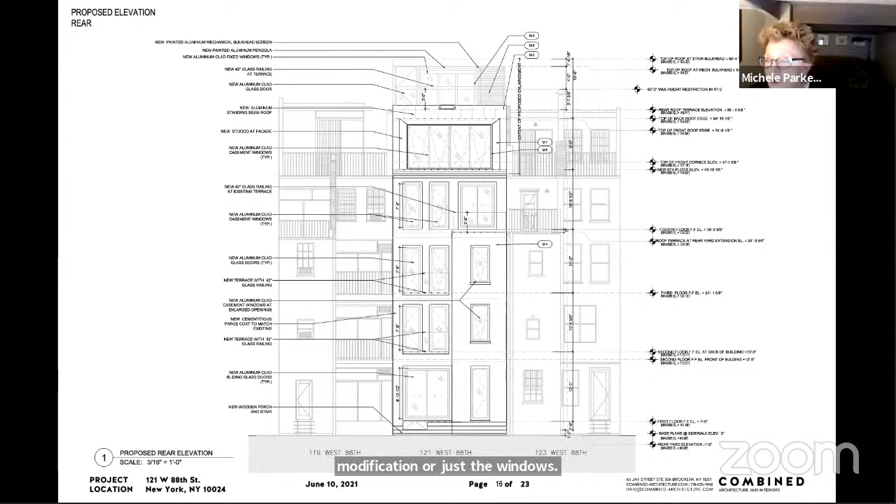So our resolution would approve moving the entrance, approve the addition on the rear, but not find the rooftop addition appropriate to the historical district. That's right. Sorry, one important clarification. There's no proposed enlargement on the rear of the building. It's all existing, so it's modification of just the windows. I missed that. I'm sorry. Could you say that again? There's no proposed enlargement on the rear of the building. The only modification is the window fenestration. So there's no rear yard enlargement. So we would approve the changes to the fenestration on the rear. Yes.

Okay, so I think we have a resolution. Am I right, Kay? Yep. So the resolution is to approve the movement of the entrance to the building, to approve the fenestration on the rear, but to find the rooftop addition inappropriate to the historical district, and disapprove that. All right, I'll take a vote on that. Before you do, Michele, there are 3 people still in the attendees. I wonder if anyone is there from the public with a comment. It's Pauline Dang and Ali Officer. No one's got their hand raised, but just want to check. I assume they're here for the next and last project. Okay, so I'll take a vote on the resolution.

Page? Well, there are 3 parts to the resolution. The entrance, I agree. The rooftop addition, no. And I'm going to also vote no for the large fenestration. It has no diminution. The windows are the maximum floor to ceiling that you can give. So we're going to call A the front facade, B the fenestration, and C the rooftop. So you're yes, no, no. Thank you. Peter, on the 3 parts to this resolution. Entrance is yes. Fenestration in the rear yes, and rooftop no. Okay, thank you.

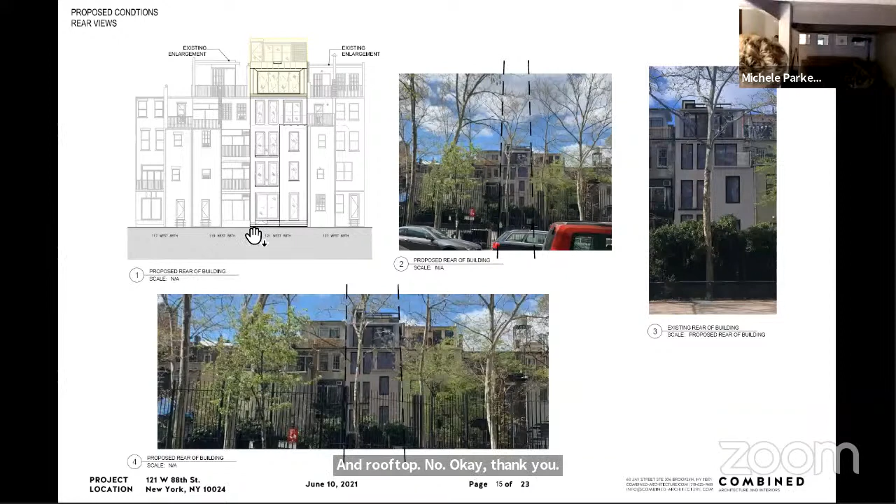Josh? Are you still here? He's here. I was muted. Okay. On the front entrance door, yes. On the rear fenestration, I'm abstaining. I just don't understand it enough to say okay. And C on the rooftop addition, no. Okay. Sue? Yes, no, no. I'll have what Page is having tonight. Jay is absent. Madge. I always want to call you by your proper name. Okay, yes, yes, no.

Kay, I'm going with Madge and a yes, yes, no. And same for me. Yes, yes, and no on the rooftop. We got everybody, Paige Williams, 1, 2, 3, 4. Okay, are there any non-committee board members, Ira, who would like to vote?

I would like to vote. Thank you. I would like to give one yes for the entrance, which I'm grateful is happening. Yes. And I'm going to give 2 no's on the other counts. Okay, thank you, Ira. Is there anybody else, a non-committee board member here? I don't see anybody.

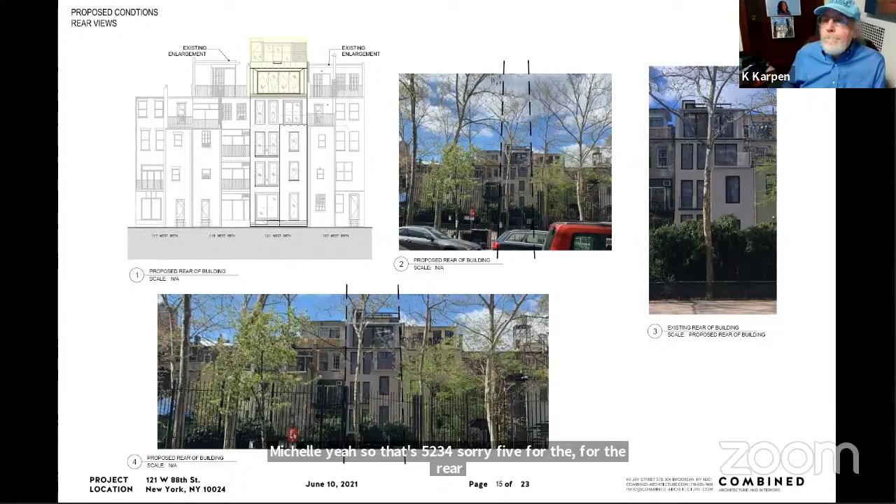No, 4. I have Peter. I thought Peter voted yes, no? Peter, yes, that's what I'm saying. Peter voted yes. Madge, Kay, Sue, Josh, and Michele, yes? Michele. Yeah, so that's 5 for the rear fenestration. 5 to 3 to 1 to 0. Yes, we had 1 abstention. Yeah, that's too many. We only have 8 people.

Yes, so that's 5 to 2 to 1 to 0. No, but Ira joined in. But he's not on the committee, he's a separate vote. Oh, that's right. Okay, beg your pardon. So it's 5 to 2 to 1 to 0. Okay. And for the roof, it's

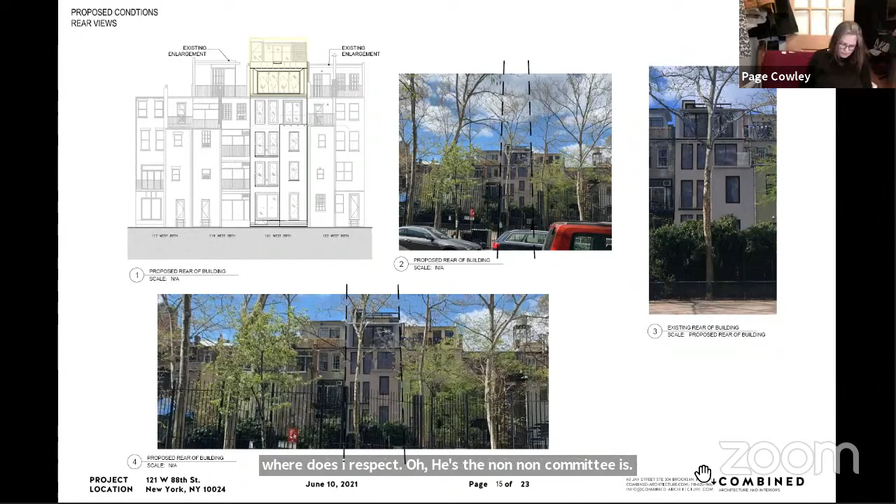Okay, wow. And where does Ira's vote go? Oh, he's the non-committee, so his vote was yes, no, no. Got it. Thank you. Okay, and do we know when it's calendared? Calendared for next week, the 15th, along with the Museum of Natural History and the Historical Society, FYI. Thank you. All righty. Thank you very much. And one more.

Okay, 333 Central Park West. So that must be Pauline. Hello. Hi. Should I read it? And Ali is the principal architect and he's going to join. Ali, be promoted. Hi. Welcome. You've endured a long wait already. I have a funny feeling I had the easier part. What's your whole name, please? My first name is Ali, A-L-I, and my last name is pronounced Hochek, H-O-C-E-K. Thank you. So I will start.

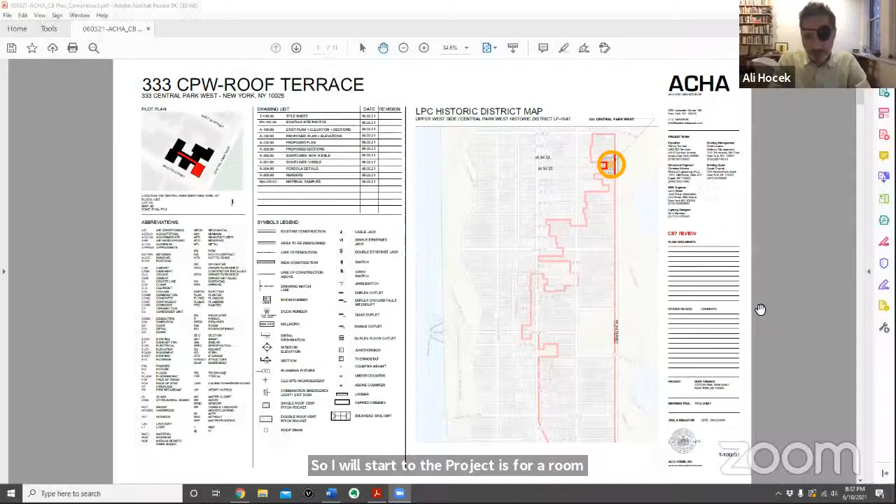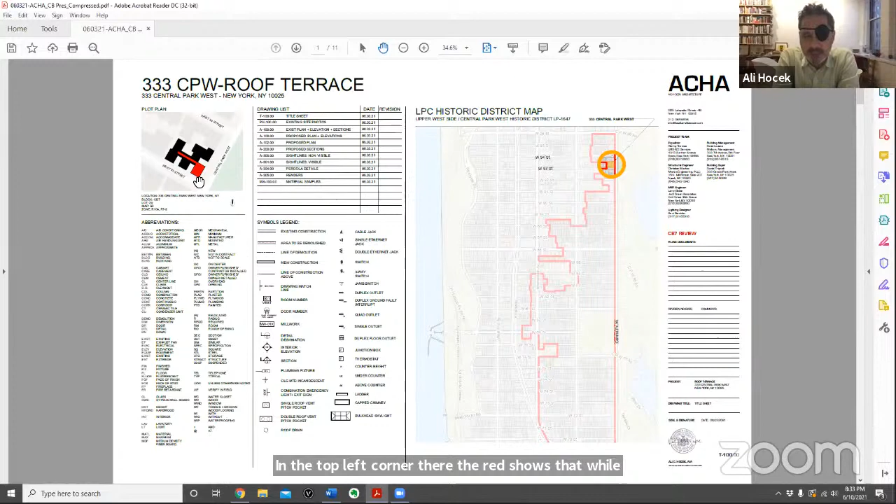So the project is for a rooftop terrace at 333 Central Park West, also known as the Turin. The building was designed originally in 1909. It's a neoclassical Renaissance revival building. It's 12 stories tall, and we are looking to put a roof terrace onto it. You can see from the orange circle that this is bordered by 93rd Street on the south and Central Park West on the east side. In the top left corner, the black shows the whole building, the red showing the wing in which the main part of the proposed terrace would be located.

Let's go to the next one. Here are the tax photographs. The big difference from its current state is the cornice was removed, probably sometime in the 70s when such historical errors were made. The building is made up of limestone and a very pale, similar in tonality, brick. The roof has 6 bulkheads, 1 elevator bulkhead, 1 stair bulkhead, a water tower, and I think that's it. Those are all existing. We don't plan to change anything that is existing.

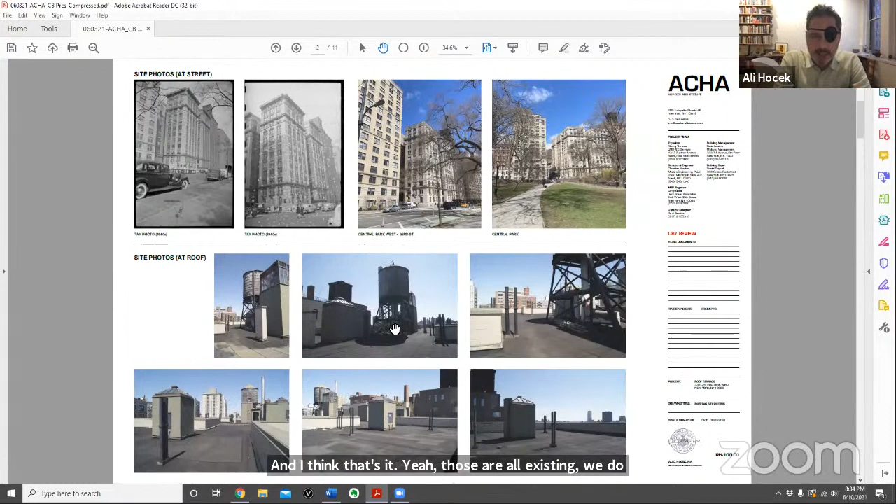Here we see in red the footprint of where the terrace area would be. I'll go through the actual components of it in the next slide. But here you can see that the bulkheads are largely of the same height, except for the freight elevator and the water tower next to it. And these are fairly prominent, and they can be seen as far away as the park.

Now here the red is, again, the terrace area. On the far left, which would be the westernmost part, there is an existing stairwell, and we are proposing to put in a restroom and storage room. So it's a bulkhead. To the right of it is a water tower. Then to the right of that is that very large freight elevator.

All of the elevator bulkheads have skylights, and they're rather attractive. The faces of the bulkheads are corrugated metal and not so interesting. Then as we work our way to the right, to the east, we have new paving material. We ramp up to a slightly raised platform, and then across to the main terrace area. There is an existing bulkhead there, again, another elevator bulkhead.

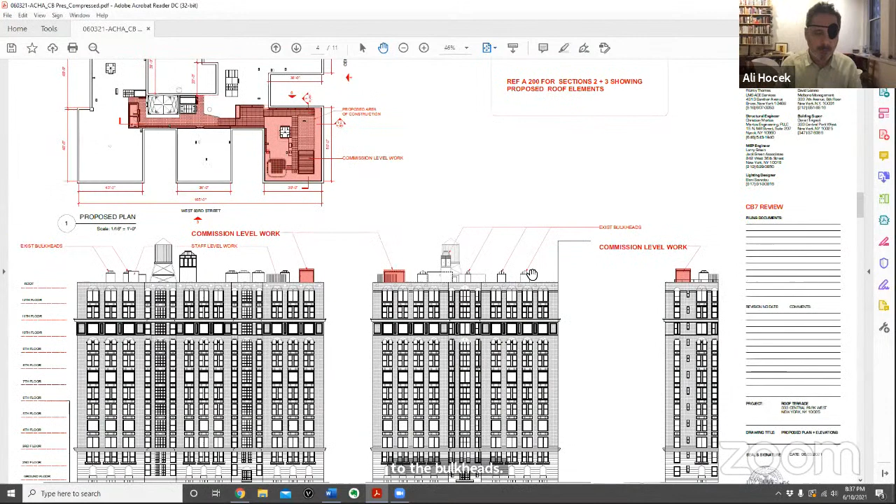It's marked in red in those elevations, though you can see that it is consistent in height in proportion to the bulkheads, except for the one very large one, the freight elevator, and the water tower. Pauline, if I've overlooked something, please interject.

Sure. So again, we have some photographs of the roof across the top, existing conditions. On the bottom right, we've marked the location of the pergola. The pergola is set back from the parapets 5 feet. So with the parapet, it ends up being closer to 7 feet on the east and south sides. Let me just see if there's anything else in these notes. I think that covers it for this drawing.

Here on the top, we see the water tower and the freight. On the left is the stair bulkhead and the proposed restroom and storage enclosure. In the drawing in the middle, you see some of the planters that line the path from the freight elevator to the main terrace area. And then here we're looking west, and this is the first glimpse we have of the pergola

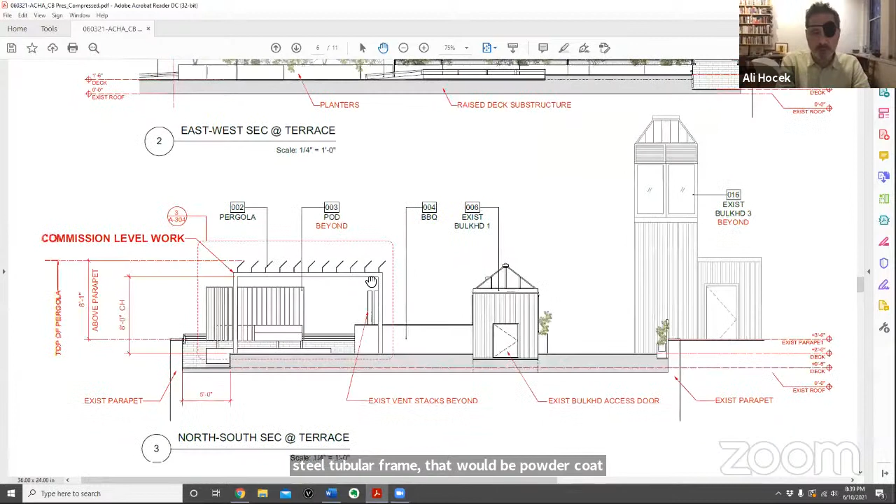in elevation. The pergola is made up of a 5-inch square steel tubular frame that would be powder coated, and it would have louvers. Louvers give shading, and concealed underneath them in the horizontal members, there are LED lights that light up and softly reflect off of those louvers. So they serve 2 purposes, shading and indirect lighting.

How high is that pergola? So the underside of the pergola when you're standing on the deck level is 8 feet. And then the louvers are, correct me if I'm wrong, under 18 inches. Yeah, 18 inches or under. So it's 8 plus 18? 18 would be the louver itself, yeah. Excuse me, Madge. It would be 8 to the underside of the beam, and then the 5-inch beam, and with the beam, it's 18 inches. Yep.

But then it's elevated on a deck that's 2 foot above the existing roof. Something is a little off. The existing bulkhead access door, how high is that? It's a small door. It's about 3 feet. Oh, okay. Yeah, it's a small door.

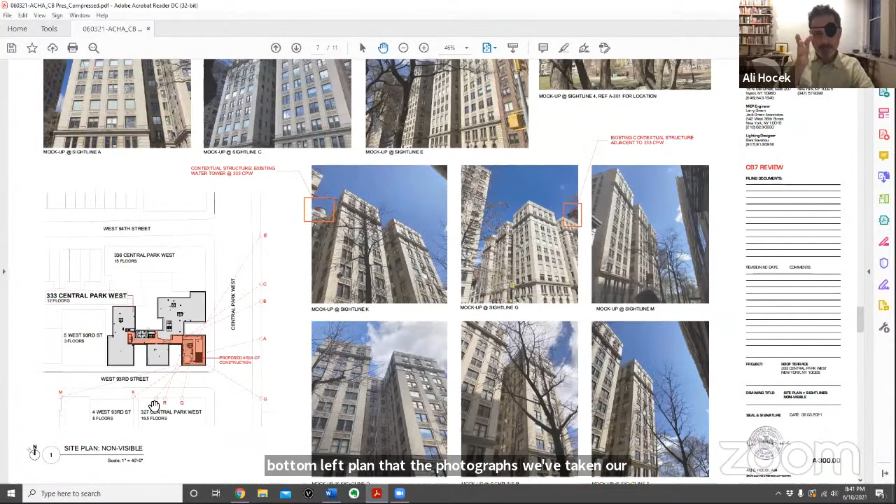You can see from the bottom left plan that the photographs we've taken are from across the street, not just the sidewalk, but we went up against the wall of Central Park to take these photographs, south at 93rd Street and north to 94th, and then down 93rd as well. These are all non-visible.

So in these shots, nothing is visible. And I'll show you a detail section. You'll see where the issues are, though. The rectangles show some of the contextual structures: there's a penthouse on 93rd, and the adjacent building has a very large, it's shrouded now in construction fabric. I think it's a water tower, I'm not quite sure what it is, but it stands to reason it's a water tower. Maybe water tower and elevator penthouse.

Let's go to the next one. So then our next photographs are from, oh, sorry, would we go back one, please? The worst case scenario of all the photographs taken from the street, sidewalk, the most exposing, let me say, is the south one there. If you can note number 1 there. That's where we have the most exposure. In the next one, taken from the park, we have the most exposure from number 6 over there.

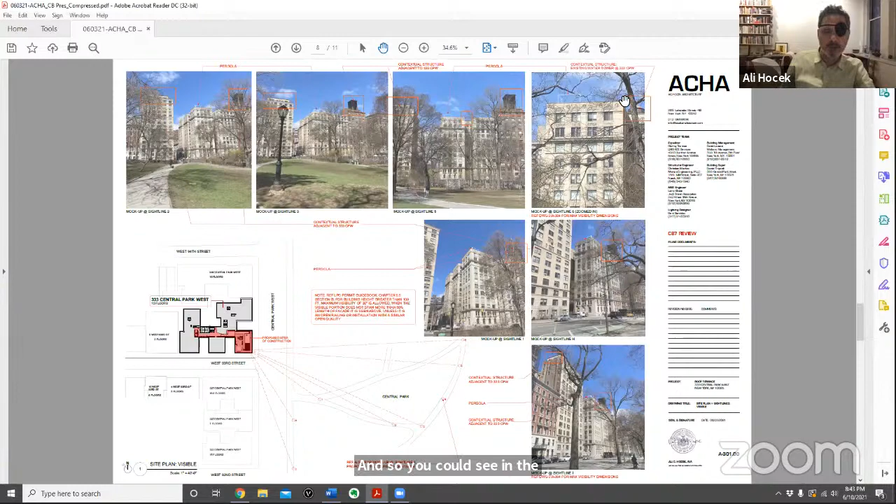And so you could see in the upper photographs, the middle 2, you could see the black shrouded mystery construction there. In the middle of the third one, going from left to right, you could see some of the water tower, and there's a large vent that goes up from the boiler. That's also slightly visible there as well. We've mocked up in Photoshop the outline of the pergola. On the far right, that's blown up so you could see it more clearly, but it's there on the left in the middle photograph as well. So you can see it's fairly discrete, but it's there.

And then on the bottom 2, if you could scroll, Pauline. So again, we're seeing that black structure, and from inside the park, we're seeing a little bit of the pergola as well. The rectangle on the left is the penthouse of the neighboring building, and to the right is the black shrouded bulkhead.

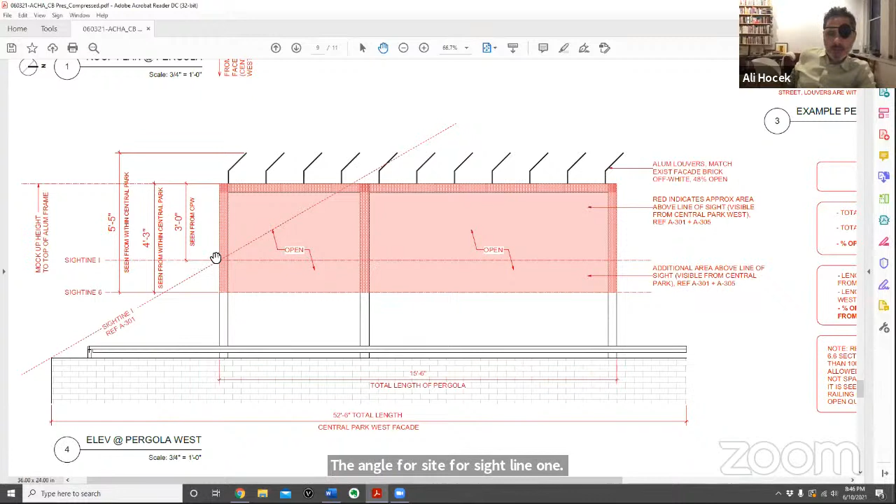So here let's look at the drawings first. We're looking at a plan, and we're looking down onto the louvers. The louvers are braced intermittently with horizontal members. In elevation, we are seeing in red from sight line 1 and sight line 6 that we discussed. Sight line 6 is in the park, and sight line 1 is on the sidewalk across the street at 93rd. The angle for sight line 1, the top of the pergola is 3 feet above that, and Landmarks has no comment about that. So the louvers are why we're here today, really.

But there is also sightline 6, which from the park we do see that red portion from, it's 4'8", I believe. 4'8", is that it? I can't read. It's 4'3" to the top. Thank you. Let's go on to the next one. Oh, sorry, let's zoom out and let's look at the photographs.

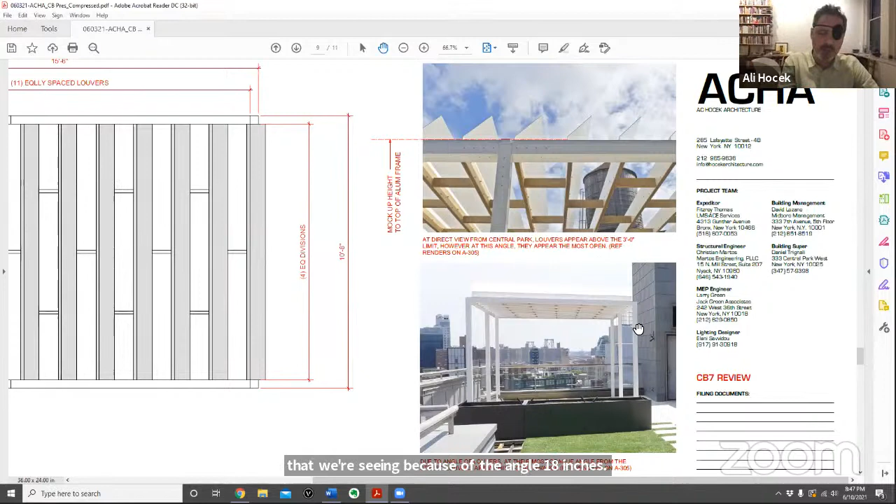So this pergola, the clients were very interested in another project we did at 285 Lafayette Street in Little Italy, Soho. Here you could see it's a similar structure with the louvers, the thin framed posts. What I'd like to point out is that the louvers, when you look up, you see much of the sky. It is somewhat obscuring, but I would say 50% or less. When you view it from what would be the south, in the case of 333, because of the angle of the louvers, it's much squatter than the 18 inches that I mentioned earlier. So it's a light frame. That's the idea, to make it as discreet as possible.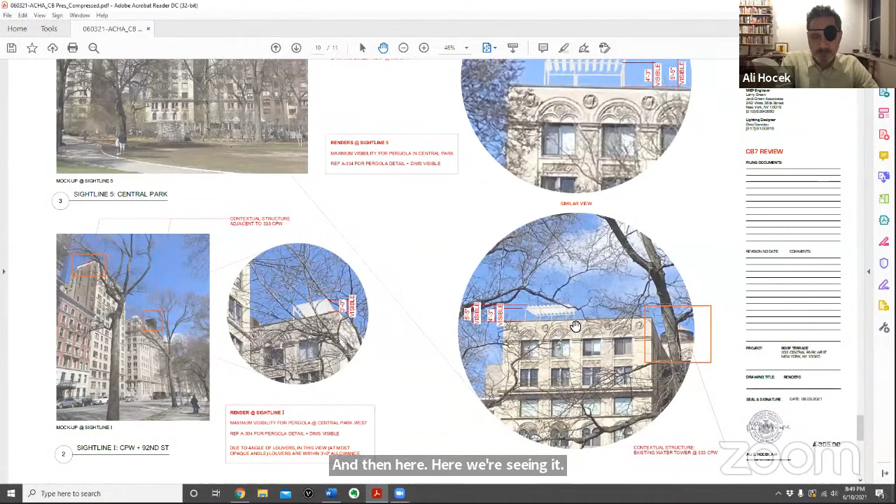And so from the south, looking north, the photoshopped image on the left shows the pergola. Can you point to it right there? And then we've blown that up, and you can see it here: we're seeing the frame of the pergola, but the louvers themselves, because of the angle, fall within the sight line of the top of the pergola. And then here we're seeing it pretty much straight on. And again, we're looking from the park, as in the top one. It's a fairly open structure. I think we have a couple more images.

So, materials. The materials have been reviewed by Landmarks; they've all been approved at staff level. There's porcelain tile in a light gray tone, kind of a granite attitude, let's say. There's artificial grass, which we also used in that terrace that you saw a moment ago, and it reads quite well and not like AstroTurf. We wanted to use Ipe, but then we realized that Ipe is not harvested very sustainably, and everybody is using it. So we're looking at Cumaru, which is also a tropical wood, also extremely durable but sustainable.

Below that, to the left is the cladding. There's a barbecue, and it's the cladding material around it, Dekton. Perforated metal is for some of the vines that'll grow along the edge of the parapet. Those aren't seen in the sight lines, or they're within the less than 3 feet when they're seen. So they've been approved by staff level. Perforated metal is used for the mesh on the right, and the perforated metal is used for some screening material at the pod.

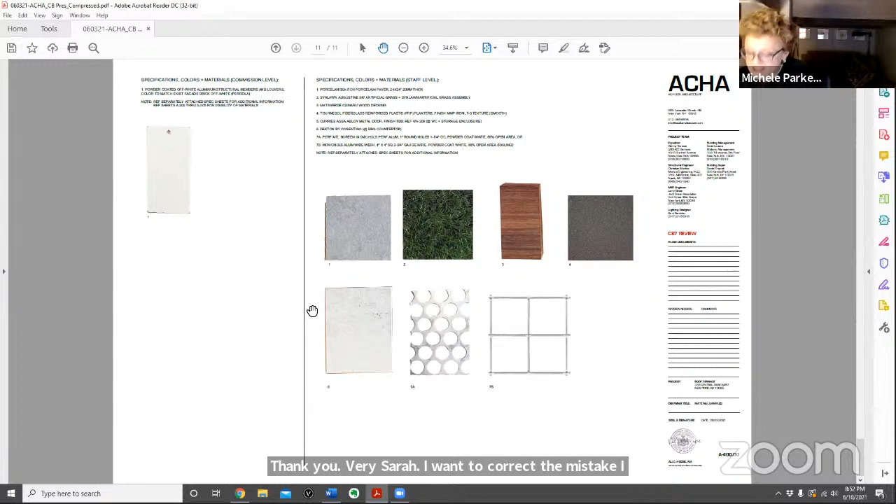I want to correct a mistake I made. I said that the last applicant is in front of LPC next week. I was wrong. It is this address that's in front of LPC next week on the 15th.

Ah, okay. We wanted to ask about the scheduling of the resolution too, because I think there was a little bit of confusion. So I had spoken with Jessie Nieves, the community associate, and she was saying that we would present to you, the preservation committee, tonight, but then the full board issues the resolution July 6th at their meeting. Is that right? So we need to wait for that in order to get the resolution? Well, I'd like to ask you to do that. Yeah. Because it probably holds more weight for you to have a resolution from a full board than a committee of now 1, 2, 3, 4, 5, 6, 7 people out of 50. Okay. Yeah, we just wanted to clarify if we were getting different messages. Okay, thank you.

Great. Okay, any other questions? Yes, Pauline, will you be able to change the scheduling for LPC in the next month so we can have full board review this? Yeah, the person we're working with, I think, is helping us do that. Great, and then just have them send a note to Jessie that says the job was done. Okay. I appreciate it. Any other questions about the structure of the proposal?

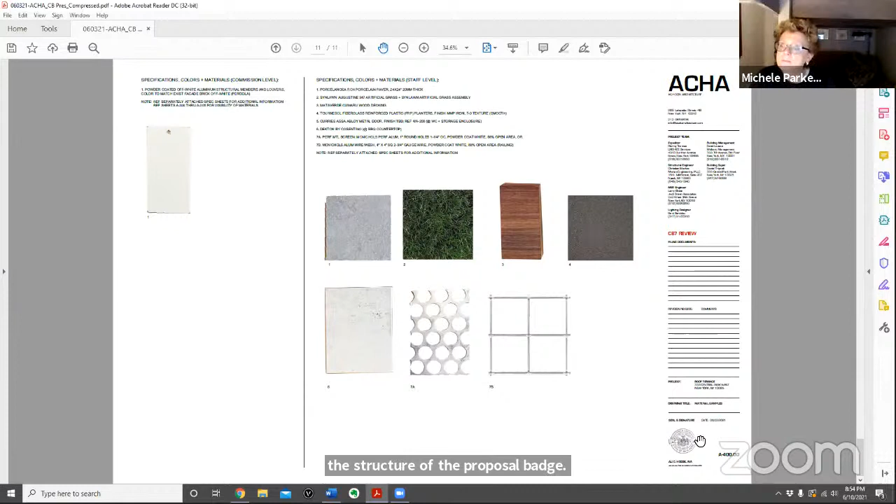Madge. We can't hear you, hon. We still can't hear you. Sue, can you try to unmute her? I'm trying. Okay. Page? Yes. Should I go until we find Madge? Yeah. Okay. Please.

Well, first of all, this is lovely. I mean, the design thought and the fact that it's your second attempt at doing a similar type of pergola is lovely. But, you know, Fifth Avenue, Central Park West, the north boundaries, is pretty sacrosanct. And while you show a shrouded water tank and elevator bulkheads, those are things that you expect to see on the roof. And they're familiar friends. And what I'm worried about is this one, as elegant as it is, it does break up this building, which is pretty much intact, even including the windows, the door, everything. I had a friend who lived there for a while. And I just think this is the wrong approach.

So 2 things. I appreciate you showed us your work. Was it Soho where you did the first one? Little Italy, Soho, yeah. Okay, Little Italy. That's a very different neighborhood than something on Central Park West, to be honest. And the pergola is a great idea, but it doesn't reflect. And I hate to say it because as an architect myself, you fall into a trap of copying some period piece rather than doing something original that the client really loves. So my question is, is it possible to move the pergola further west so that it is not visible and reduce the size of it?

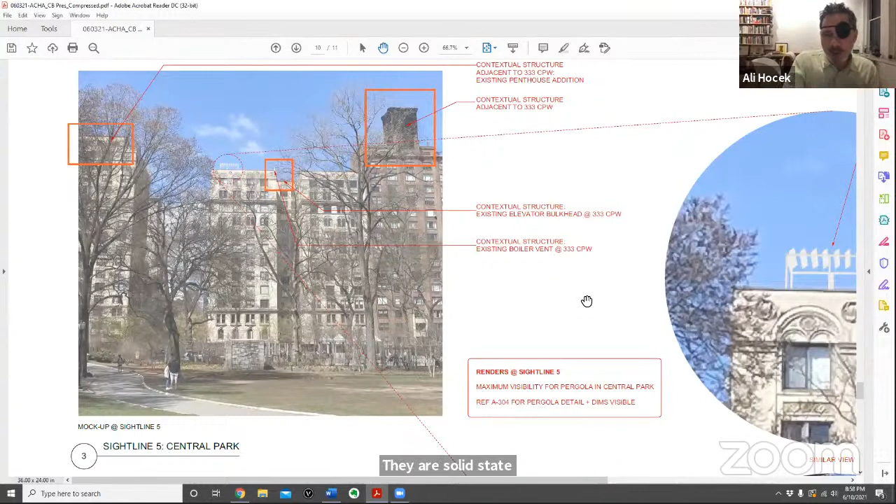Okay. So, what I want to say though about those other structures, which Landmarks actually suggested we indicate to give some context, they are solid structures. This is the outline of a structure. Its massing is a very different thing. Yep. That's one point. Second point I want to say is that we are, if you will, within right up to the top of the pergola.

The question becomes the louvers themselves, which, your point is well taken, of course. I would like to believe that it's quite open. We are doing kind of forensics here where we're diving in and looking at the detail of this, but you can see when we're into Central Park, we had to circle things so you could find them. I don't think the neighborhood is going to go downhill. I think this is quite discreet, and one hopes also setting a standard for elegance and good articulation, which I appreciate that you also noted.

Thank you. But those are the two things I would say: the massing of it, and also the louvers, which I think will provide shading and be advantageous, but also provide a soft kind of lighting up there because it's reflected light.

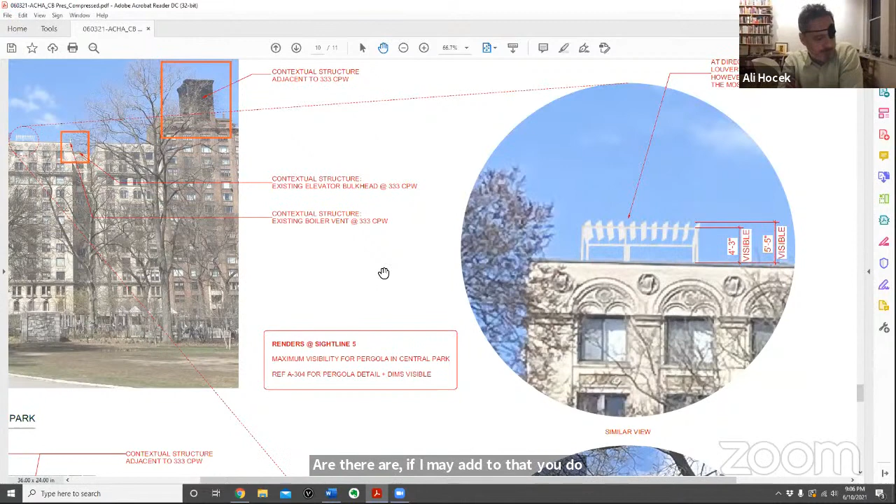Yeah. I still wish that you could move it further back. I think that would be the best, but I'll wait to hear my colleague. If I may add to that, there are, I think, 40 apartments. To get to this area from that rear stair is a long walk. So there's a fair amount of preparing that surface to get to this area of the terrace. So there's a lot of expense and effort that goes to getting to the part that we really want.

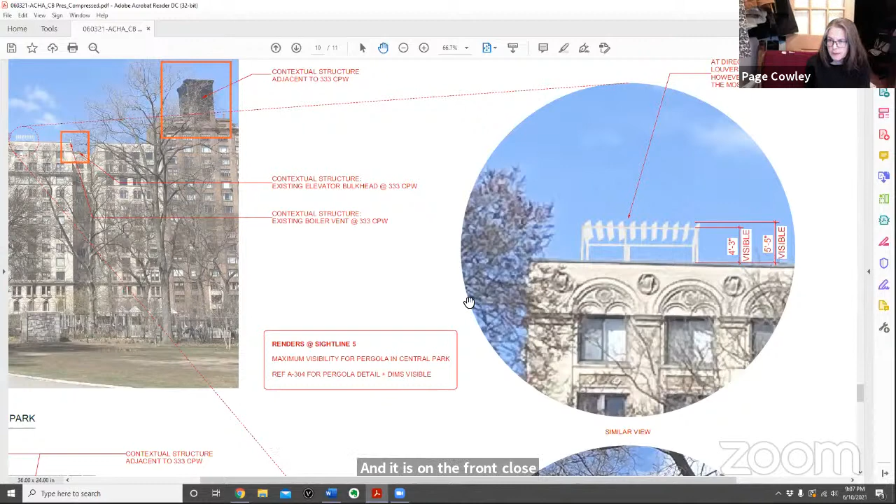Once we get there, because there are so many occupants, we want to give at least 3 distinct areas, if not 4, where people can gather. If we move the pergola further over, we're going to lose the pod, and then you're down to 8 people being able to use half the terrace that we spent the co-op's money building. So that's part of the issue with that. But I thought this was on the southern end of the building, closer to the front of the building. So I don't understand. I appreciate this is for all the residents in the building, correct? That's right. But I don't understand why you can't push that.

Go to your site plan if you wouldn't mind. There you go. Why can't you take your orange circle and move it up the page and put it at the back side? Put it where? Put it at the back side. Right now, it's on the front of the building against 93rd, correct? Yeah. So if you moved it. You mean swap further north? Swap the pod and the pergola. Well, then we'll see it from 93rd. But it's not from Central Park. That is the sacred cow.

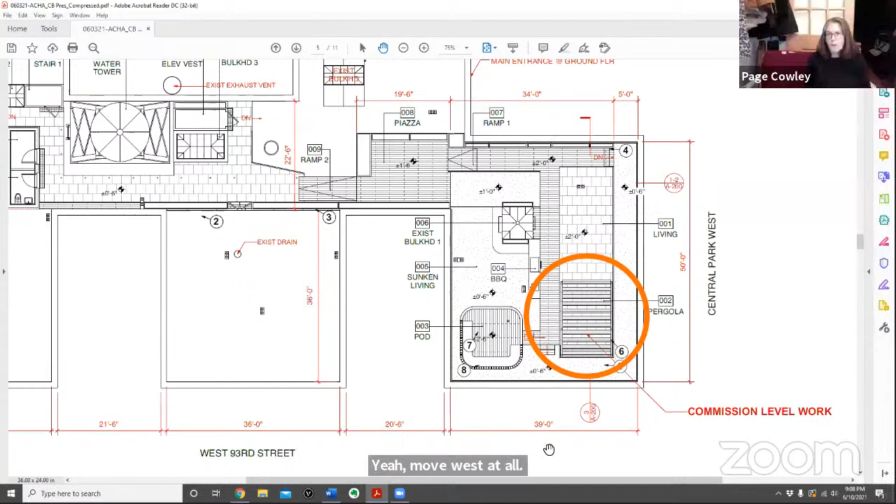You can't move it west at all? That's west, what you're saying, is flip the pod and the pergola. Correct. And I would rethink the blade. I think you're creative enough to come up with a different type of lighting scheme that won't highlight the architecture of the blades, but keep it shining down rather than up. My concern is that we're going to transfer the problem to another place.

Granted, it's not Central Park, but we're still going to see it obliquely as we walk along the park, because it'll be taller, even though it'll be to the west side. If you're saying that you would approve it by flipping it, I don't know, we would have to see that and evaluate its impact, to be honest. But anyway, those were my questions.

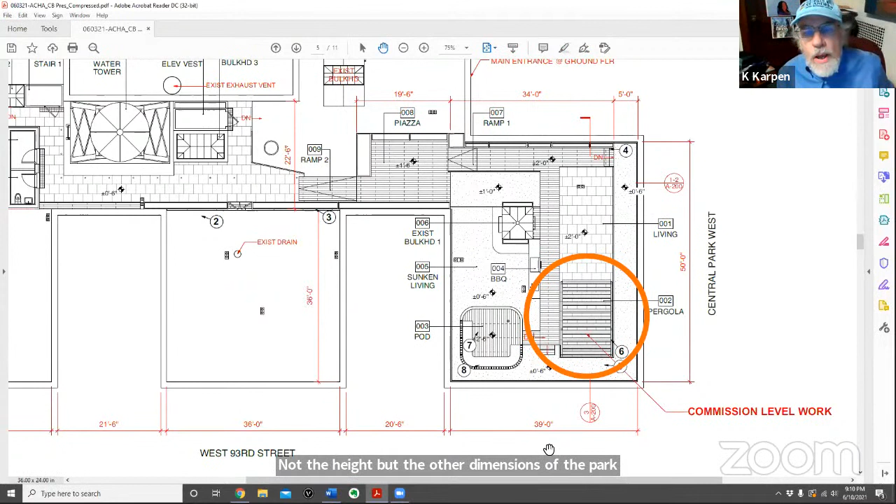Thank you. Other questions or thoughts? I guess my question, and I could probably just try to read this: what are the dimensions, not the height, but the other dimensions of the pergola? How wide, how long? I'm going to defer to Pauline on that, please. It's about 10.5 feet wide by 15. Okay, thank you.

Any other questions? I agree with Paige also. The pod and the pergola should be swapped. Because I mean, I see the point. If I were up there, I would want to be sitting somewhere where I could look out over the park. I can see why the pergola is sited there. Another part of my concern is that the pergola is just so inconsistent with the style of the original building. It's so modern and lovely and elegant, as Paige says, but it just doesn't go with the building.

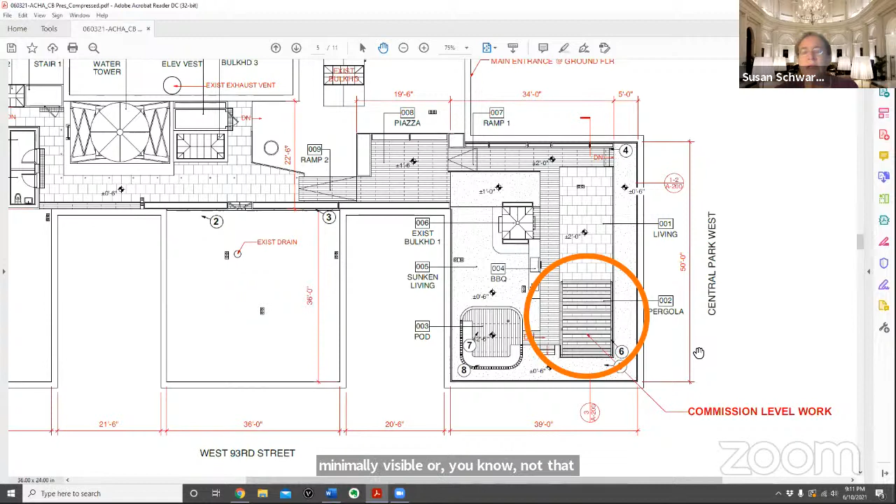And I still go back to this. I have this problem a lot when people say it's minimally visible, or not that visible. It's either visible or it's not visible. And I agree with Paige. Central Park is something we strive to protect, particularly at night with the lights. I just think this is ill-advised.

I didn't love it when I first saw it, but I'm feeling warmer about it. I kind of agree with Paige about the lighting. That's an issue. To have it beamed up and reflected down might call too much attention to it at night. You showed the mock-up of it against the blue sky.

I wish New York always looked like that. It doesn't. I think it would disappear against our usual grayish, whitish sky a lot of the time, and I would not dislike it. It's not really my style, but I don't live there. I don't think it's a huge problem. I guess I'm probably in the minority, but I would vote to support it.

If it were a matter of the lighting, certainly we could forego the louvers as a lighting element, and we could hang a pendant that you wouldn't see. Yeah, I think it's a cool idea. I just think it would be a little garish at night. We actually built one of these. I could say that they're not garish. I could show you a photograph, but the light is dramatized in a photograph, and that wouldn't give it credit.

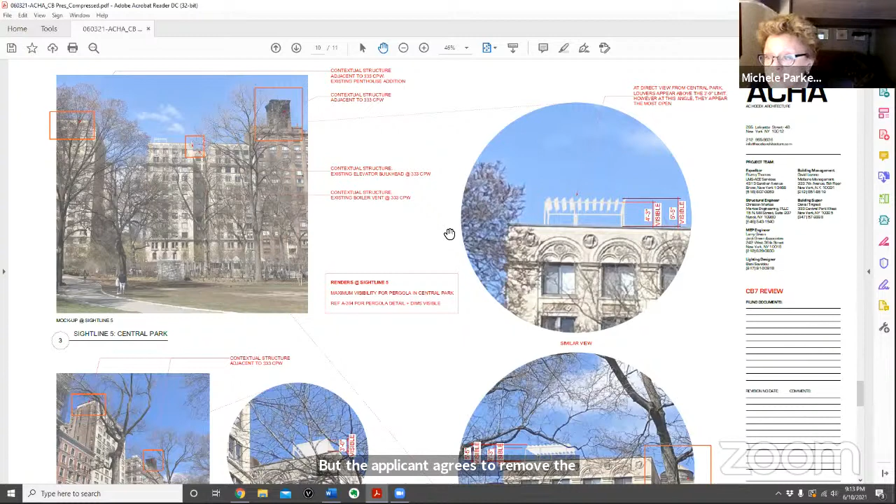But can we call the question? So the resolution is to approve as presented, but the applicant agrees to remove the lighting on the pergola. Excuse me one second, I'm really concerned with that, because doesn't that mean that later on, once it's up there, they can, without permission from LPC, just add the lights? That seems like a real problem.

Yeah, if LPC says they can have the lights. Even if LPC says they can't. Can I answer that? Sure. So in order to get the lights to work, we have to wire within the structure to get to the locations of the louvers. It would never happen after the fact, because you can't get inside those tubes. You only get inside them while constructing it, feeding the wires through. And we would never tie the wiring on the outside, because that would look hideous.

So I think it's quite certain that if we wanted to be deceptive and try to do it later, it wouldn't happen. Sir, with all due respect, I'm not suggesting your firm would do that, but it's very easy for me to imagine somebody taking twinkle lights later on and adding them so they have light in the evening. I don't want to belabor the conversation. It's already almost 9:30. Go ahead with the resolution however you want.

I'm not going to support it because I think it's inappropriate. It's a lovely design, it's just inappropriate for this building in that location. I agree. All right, so should I take the vote, Kay? Yeah. So Susan, you're a no? Yeah. Josh? Are you still here? Yeah, I'm still here. I'm a no.

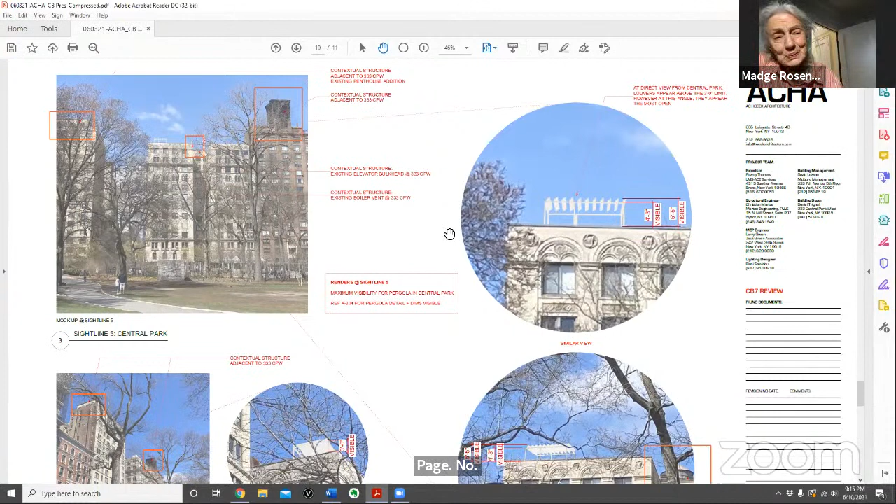Peter? Yes. Paige? No. Madge? No. Kay? Yes. And I'm a no. So the vote is 2, 5, 0, 0. Are there any non-committee board members? Is Ira still here?

No, he left. Okay, so the resolution fails by a vote of 2, 5, 0, 0. We do not approve. I'm sorry, is it 5 or 4? Is it 5? 5. It's 1, 2, 3, 4, 5. 5 of us. Thank you. Thank you very much. And this is the one page that we'll have to work on before the 15th, unless you're going to change your date at LPC.

I think we were planning to change it to get the full board. Oh, that's right. And you said you'd write to Michelle Booker and tell her the new date. And that's what you're advising, is that we wait for the full board? Yes, I mean, it's up. Yeah. It's unlikely to change the complexion of the vote, though. I'm sorry, Paige, I didn't hear you. We can't promise that the vote would change just because it's before the full board. This is true. So I understand.

I have two resolutions that need to be done ASAP. 333 Central Park West, and actually this is the only one, right? This is the only one. That's right, Paige, because I made the mistake before. No, that's fine. We can do that. All right. So we could go, I mean, it's up to you. We could go with just a committee vote. And then you could do, I mean, yeah, it really is up to you.

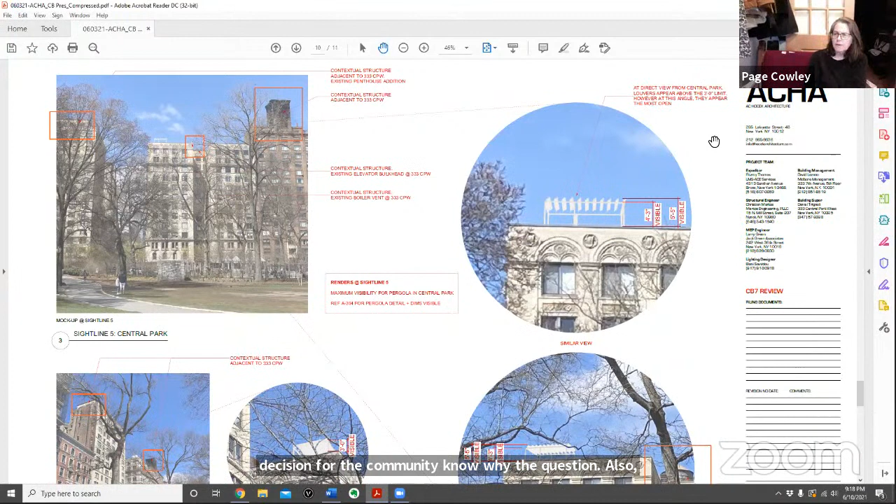One question also, sorry, Susan, have you talked to the neighbors in the adjacent buildings? Or thus far, is it a commission for the current residents? I and my firm, we have not. Okay. Whether the board has, I don't know. I don't know the board's relationship to the other buildings in the neighborhood. Gotcha. All right, I'm just curious, because it may impact the numbers of people who may be coming out for the full board meeting. I see. You need to notify the immediate neighbors that this is happening. Gotcha. Was it properly noticed? Was it posted? Yeah, sure, okay.

Yeah, but it's a pandemic and people are away after Memorial Day, so. Yeah, at some point we should address that and think about it. I mean, I walk the streets, there's a lot of people out, so it may be time to go back to our original posting requirement. I think so. Good point. I think it's only fair for the neighbors.

Yes. I hope that by requesting that the full board review it, we're not putting ourselves in a situation where we're going to be under additional scrutiny or extreme scrutiny, which might raise other issues that are not relevant to what we're doing here. You know? It's the pergola. Did I make that clear? Maybe I didn't. Well, the resolution will go as is to the full board. Anything that's not covered by this resolution will not be appropriate for discussion. I'm just concerned that we're flagging something. I just wouldn't want to flag this as something that is of a concern.